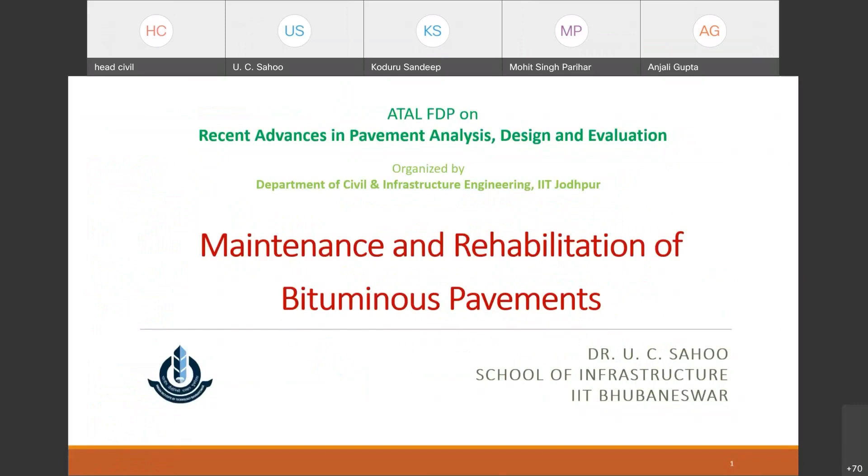This topic is basically maintenance and rehabilitation of bituminous pavements. Why I'm talking about bituminous pavement instead of just pavements in general - if you see the total network of roads in India as of 31st March 2020, it is around 62 lakhs 15,797 kilometers as recorded by the Ministry of Road Transport and Highways, and more than 90% of these roads are bituminous pavements. That's why I focused mostly on maintenance of bituminous pavements. Of course, the mechanism remains the same, however, the maintenance techniques differ for rigid pavements or concrete pavements.

The national highways comprise just more than 2%, whereas the other roads or rural roads comprise more than 70% of the total road network in the country. So when we talk about maintenance of roads, it covers both high volume roads as well as low volume roads.

If you see the growth of road network in India, it's an exponential growth, starting from 1950 to 2020-21. I have taken the data from MoRTH and plotted it, and the graph fits an exponential growth curve. With this growth, there is now a huge challenge for the agencies to maintain these roads.

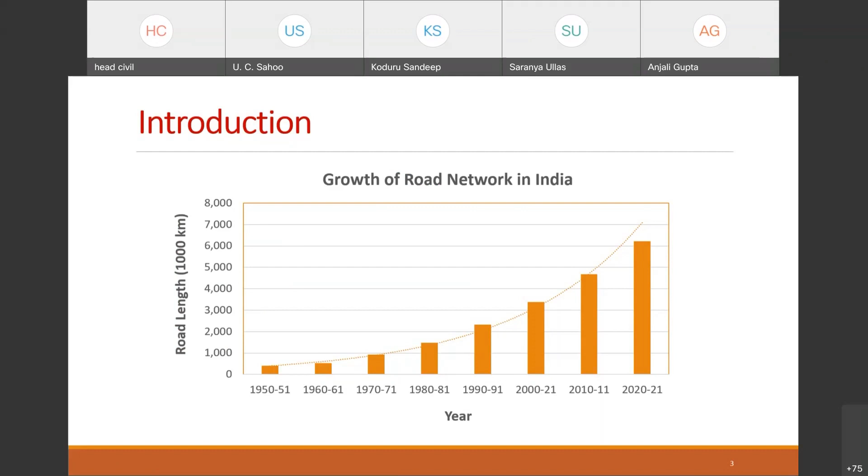So maintenance is also equally important - let us see why. The pace of highways construction in India has touched a record high of 37 kilometers per day in the financial year 2020-21. This is a big number, specifically for this developing country, and longevity of these roads is closely linked to timely maintenance and rehabilitation of the pavements. That's why maintenance is an important aspect as far as development of infrastructure is concerned.

The main concern of road users is normally to travel safely at a reasonable comfort level at any time of the year - that means it should be usable every time of the year, be it rainy season, summer season, or winter season, and at a reasonable comfort level, safely without any problem in travel. That's why road users normally assess the quality of infrastructure based on the condition of the road surface.

So maintenance is equally important as developing the infrastructure. We have been developing at a very fast rate, so maintenance should also now touch that kind of pace.

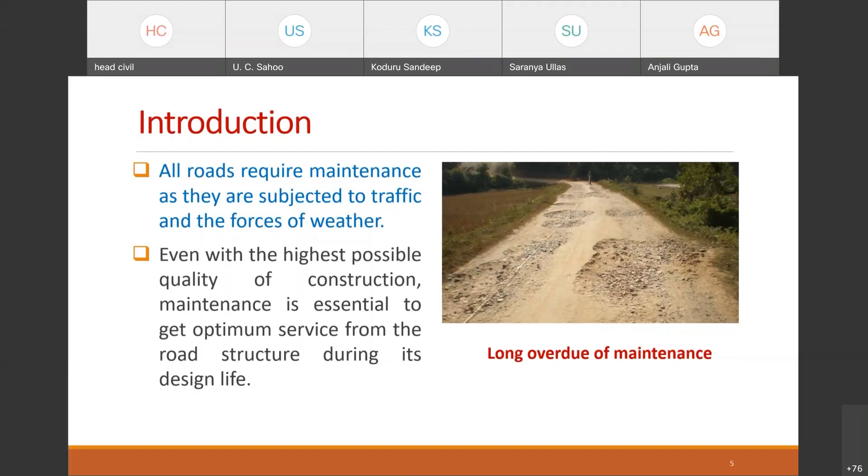So why is pavement maintenance required? Because of the deterioration of the pavements over a period of time. Why does the pavement deteriorate? Let us see the different reasons for pavement deterioration. One of the major reasons, of course, is the action of traffic - that means the heavy movement of heavy commercial vehicles, as well as overloading, which is experienced by a majority of roads, is one of the main reasons for faster pavement deterioration.

Apart from that, we have environmental factors such as ingress of water, oxidation of the binder, and loss of volatiles during heating of the binder. All this creates problems for faster deterioration of road pavements. Also, inadequacies in the initial design, specifications, and construction standards.

If the road has not been constructed considering the type of traffic and the subgrade condition, of course this may prematurely fail. As well, poor construction practice, poor specification, and poor initial design will all lead to premature failure of the pavements, which will cause the need for maintenance before it actually serves its design life period.

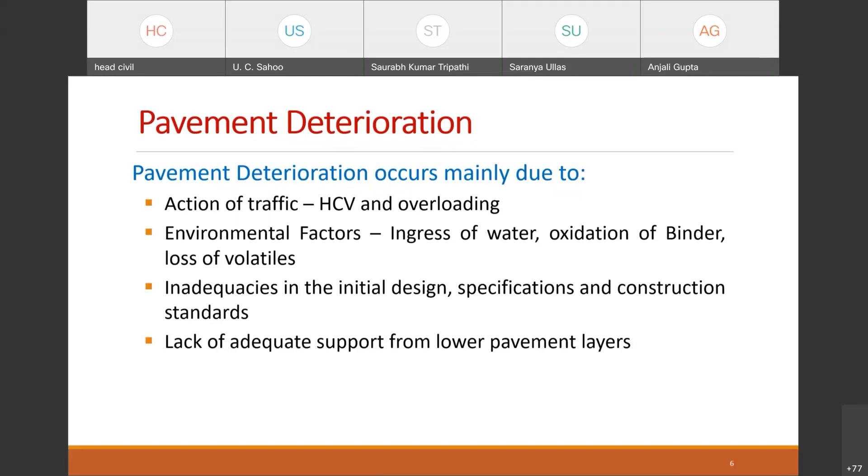That's why timely intervention is very much necessary. You need to understand where you have to take up a maintenance activity and what kind of maintenance activity, so that you can save your money and also maintain the riding comfort at a desired level.

So there is a good proverb you must be knowing: a stitch in time saves nine. That means you should understand that you have to stitch the pavement in time. That will save a lot of money as well as a lot of lives.

The rate of deterioration basically depends on the quality of initial construction, pavement and surface materials, drainage conditions, level of traffic, and the weather conditions. All these will affect the rate of deterioration of the pavements. So this is not a standard graph - it will depend on all these factors.

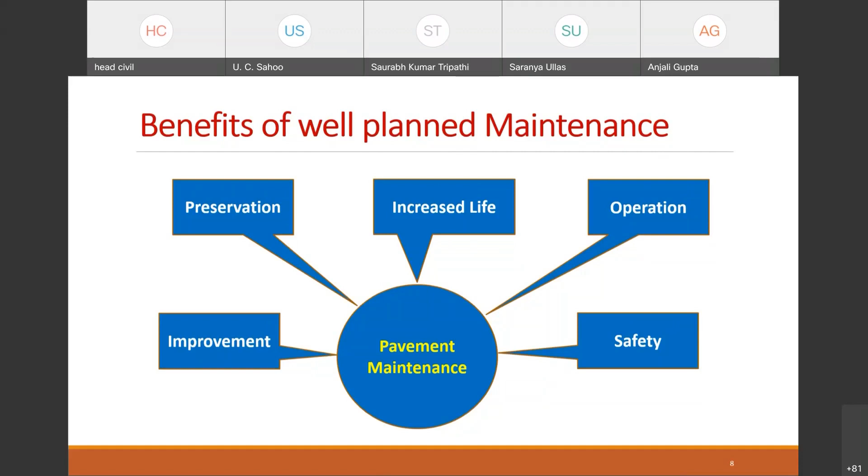So what are the benefits? It reduces the rate of deterioration, thereby safeguarding previous investments in construction and rehabilitation, because you are investing lakhs and crores of rupees in construction of the roads.

If you see nowadays, the construction of a rural road is costing around not less than 50 lakhs per kilometer, and in some states it is going as high as more than 1 crore per kilometer. For state highways and national highways, it is a few crores per kilometer. So you can understand the level of investment being made in development of this infrastructure.

But if you do not maintain them properly and timely, then you are going to lose a lot of taxpayers' money in that. So we need to understand this very carefully and judiciously, and act accordingly.

Maintenance also lowers the cost of operating vehicles, because if you have a lot of undulations, potholes, and other distresses in the pavement, it will increase the cost of operation of vehicles on that particular pavement - there is wear and tear of vehicles, fuel cost, machineries, and a lot of operating costs considered in this.

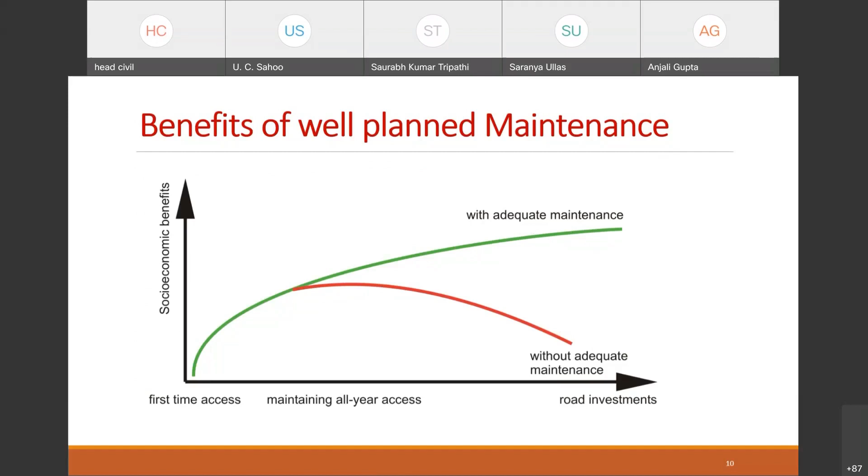There is also a need to understand the difference between maintenance and repair. There is a clear distinction between the two. Effective maintenance is clearly time-linked and is carried out before major damages are taken up.

This involves activities relating to supervision and monitoring of road assets even while they are still in good condition, so regular pavement evaluation is essential for timely maintenance. Sometimes you have to go for prediction, like plotting a pavement deterioration graph, and based on that predict how the pavement condition will be next year, and accordingly take preventive action this year so that the pavement will not fail next year, and it goes on serving traffic for a longer period without asking for major rehabilitation.

Whereas repairs are basically taken up when major damages take place or road access is cut off. It is a responsive measure, based on the damages, the repairs are taken up. Whereas maintenance is a predictive measure. Depending upon the prediction of deterioration, we take preventive action, or sometimes small corrective actions. So timely and regular maintenance requires securing sufficient funding before it becomes urgent.

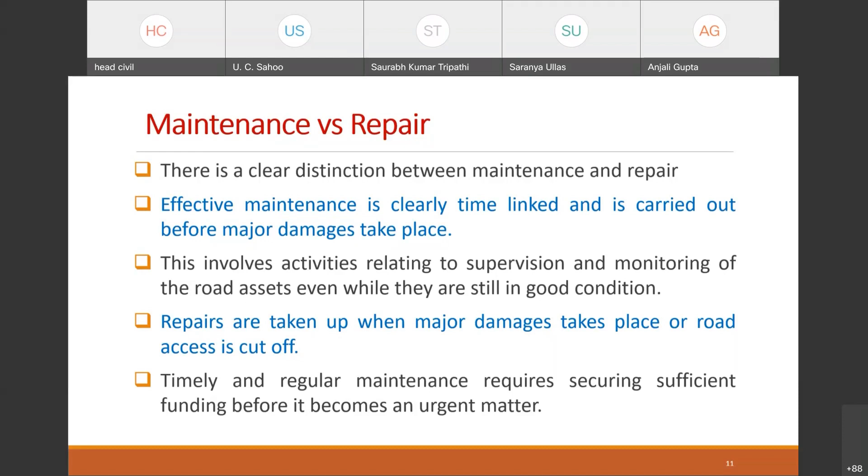Road pavement performance is determined based on the requirements of the functional and structural condition. That's why the first step for pavement maintenance is the pavement evaluation. I hope you have already gone through different pavement evaluation methods in detail. I'll touch upon some things which are linked to pavement maintenance and rehabilitation methods.

The functional requirements relate to roughness of the road surface, pavement surface distresses, along with skid resistance and other things, while the structural requirements relate to the pavement strength or the load carrying capacity of the pavements. So broadly, pavement evaluation can be categorized into two parts: structural evaluation and functional evaluation.

Structural evaluation we normally conduct using a Benkelman beam, which is a static method, and it has become obsolete in most parts of the world as well as in India, but still, with non-availability of state-of-the-art equipment like the falling weight deflectometer, which applies a dynamic loading or impulse loading very similar to actual traffic loading...

The maintenance measures are still dependent on the Benkelman beam deflection surveys. However, many agencies have now procured this falling weight deflectometer in India, and maintenance and rehabilitation actions are being based on falling weight deflectometer surveys.

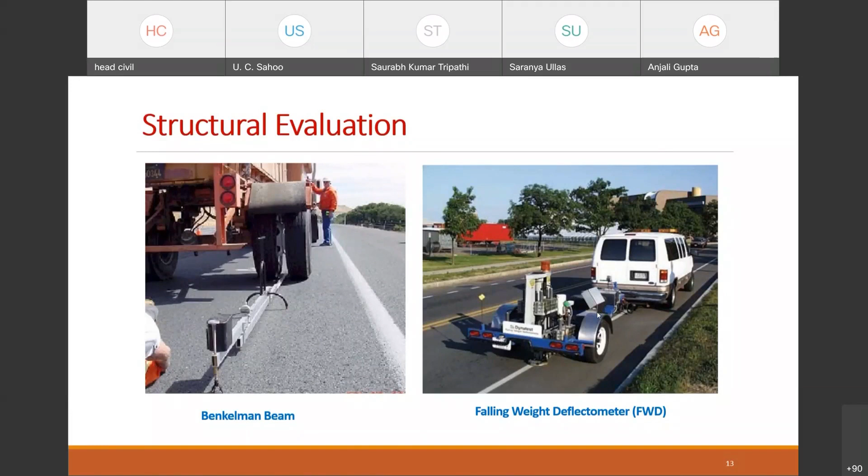So this is the falling weight deflectometer. I hope you have already gone through the literature of falling weight deflectometer in your previous presentations. If we see how it works, this is basically a non-destructive deflection testing device that delivers an impact load to the pavement surface. Here the load is dropped from a certain height, and the deflections are measured by sensors known as geophones, which are placed radially in one direction from the center of the load plate.

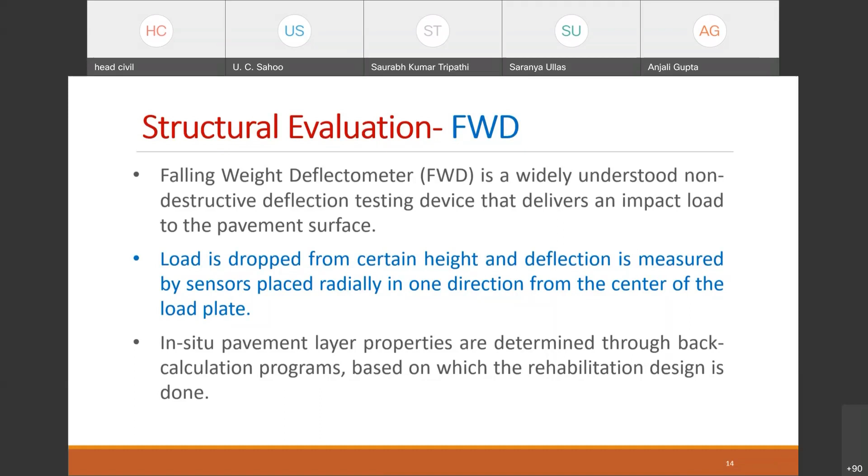Based on these deflections and the load, we try to back-calculate the in-situ pavement layer moduli. Based on these in-situ pavement moduli properties, we try to understand the existing strength of the pavement and how much overlay is required to carry the future traffic for which the pavement is being designed. Many a times we go for strengthening of the existing pavement, like for 2-lane to 4-lane expansion of pavements, we go for widening and strengthening. In those cases, we need to understand the in-situ strength, and for the future traffic for next 10 years, what should be the overlay thickness, mostly based on these deflection parameters.

The functional evaluations we normally evaluate in terms of skid resistance, roughness, as well as different pavement surface distress mapping. Surface distress mapping is mostly done using visual methods, but nowadays there are many automated methods used for different distress mapping. Skid resistance is normally measured by a simple device called the British pendulum skid resistance tester, which is used to measure the skid number of the surface, based on which we say whether the surface is skid resistant or not.

For roughness measurement, there are many devices, but the one mostly recommended in India as per IRC guidelines is the fifth wheel bump integrator. There are other devices too, like MERLIN or other roughometers, ARRB roughometer, or smartphone-based roughness devices. Many such devices have come into the market. Some are profilometric and some are response-type roughness devices. I'm not discussing these in detail since they've already been covered, and I'm presuming you already have this knowledge.

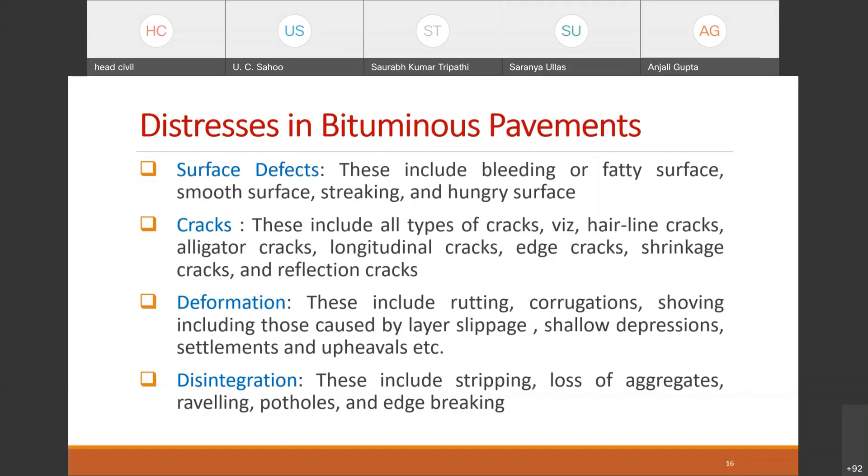What are the likely causes? Bleeding is normally caused by one or a combination of the following factors: excess binder in the hot mix, lower voids in the mix, use of softer grade binder, or too heavy a tack coat or prime coat applied below. You should already understand the concept of optimum binder content and optimum air voids from hot mix and warm mix design. If you have lower air voids, under densification from traffic movement, the binder will come out—which we term bleeding. Also, if you use softer grade bitumen with a lower softening point, when pavement temperature becomes high, the bitumen becomes soft and bleeding occurs. All these are causes of bleeding.

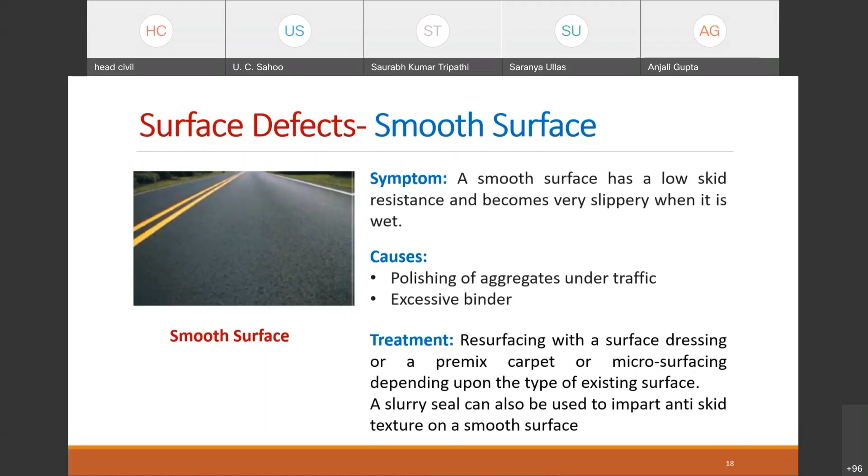Hungry surface is characterized by the loss of fine aggregates from the surface, or the appearance of a dry surface with fine cracks. The causes are basically low bitumen content in the surfacing layer, and use of absorptive aggregates in the surfacing layer, which absorb some percent of bitumen, so the effective bitumen becomes less and you find bitumen hungry surfaces.

The treatment is basically a fog seal or liquid rejuvenating material, or you can also go with a slurry seal or microsurfacing. These treatment methods we will discuss in a separate slide later.

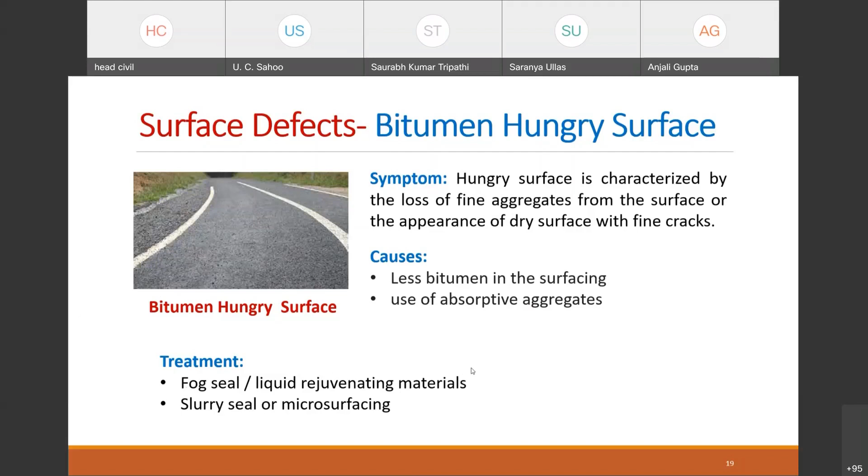Cracking in bituminous pavements includes different types like block cracking or fatigue cracking, alligator cracking, edge cracking, longitudinal cracking which may be wheel path or non-wheel path cracking, reflection cracking, and transverse cracking.

These are block cracking or fatigue cracks - a series of interconnected cracks forming small irregular blocks in the pavement surface, normally observed along the wheel path. This looks like the surface of an alligator, which is why these are also called alligator cracking.

The causes are excessive deflection of the pavement surface, inadequate pavement thickness and inadequate surfacing layer, and weakening of the subgrade or lower layers that results in higher deflection or bending of the bound layers, overloading by heavy commercial vehicles, and brittleness of the binder due to aging or oxidation, which makes the bitumen brittle and causes the asphalt to crack.

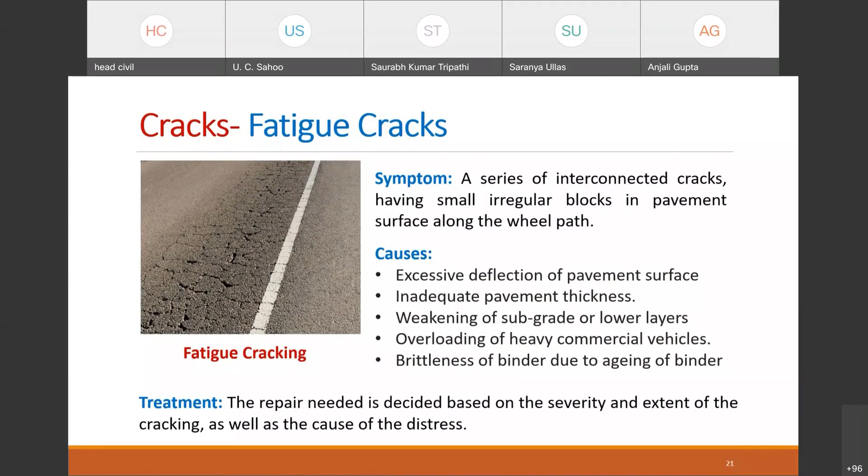The repair is decided based on the severity and extent of the cracking as well as the cause of the distress. Since fatigue cracking is a structural cracking, you need to investigate whether it initiated from the lower layers or the upper layers. Accordingly, the treatment method will be selected.

Longitudinal cracks appear in the longitudinal direction, normally parallel to the center line of the road. Causes include alternate wetting and drying beneath the shoulder surface, and improper or weak joints between adjoining layers. Also, if there is expansion or moisture movement in the subgrade, that creates longitudinal cracks in the pavement.

Treatment is basically crack sealing, preferably using rubberized bitumen, or if it is severe, you should remove and replace the cracked pavement layer with a fresh overlay.

Similarly, we can have transverse cracks. These cracks appear in the transverse direction, perpendicular to the traffic movement direction. The causes again are alternate wetting and drying beneath the shoulder surface, and improper or weak joints between adjoining layers.

Treatment is basically crack sealing, preferably using rubberized bitumen, or the same way, remove and replace the cracked pavement layer with a fresh overlay.

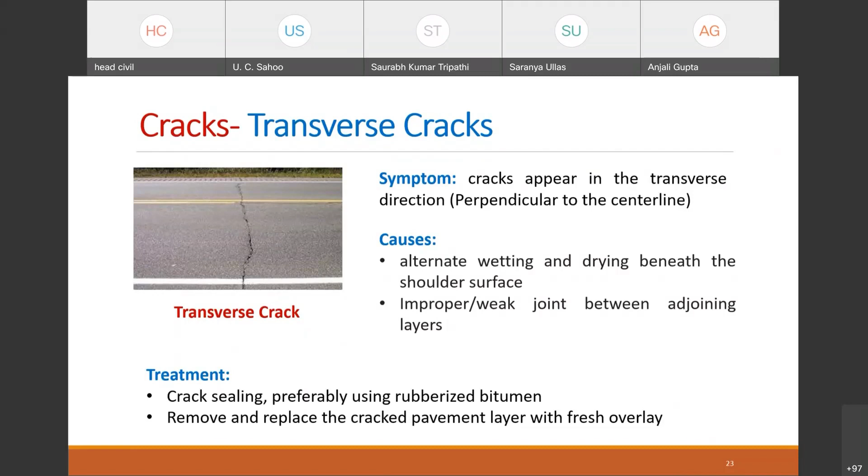Reflection cracks are reflections of cracks from the bottom layers. This normally happens when you put the surfacing over a hydraulically bound material, whether a stabilized layer or a cement concrete layer - these reflection cracks normally occur.

Symptoms are sympathetic cracks that appear in the bituminous surfacing over the joints and underneath the cracked pavement. The major cause is differential movement across the underlying cracks or joints. Due to stress concentration at the cracks forming in the bottom layers, the surface cracks, known as reflection cracks.

The treatment is either sealing individual cracks, and if there are wider cracks, going for a slurry seal, while for fine cracks using a fog seal, or else using a SAMI layer, that is a stress absorbing membrane interlayer. This must already be covered in your pavement design, specifically for flexible pavement with cement stabilized bases, where we recommend a SAMI layer so that reflection cracks do not occur on the surface.

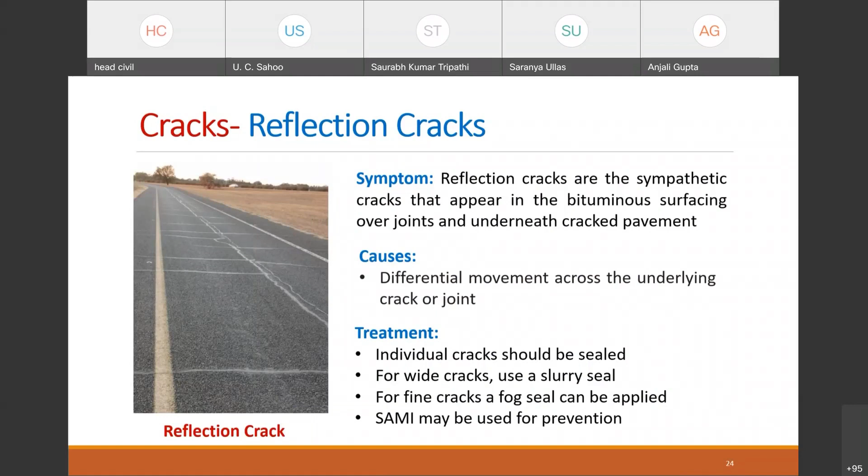For control of reflection cracking, you either go with a SAMI layer, or normally apply a geogrid over the existing layer or pavement which is likely to crack or already cracked. So you put the glass geogrid here, and then over that you put your surfacing layer, and your reflection cracks can be minimized to a large extent.

The next one is, of course, deformation, where there are different types of deformation that we see in a pavement: slippage, rutting, corrugation, shoving, shallow depressions, and settlement and upheaval. Let us understand one by one their causes and then their remedies.

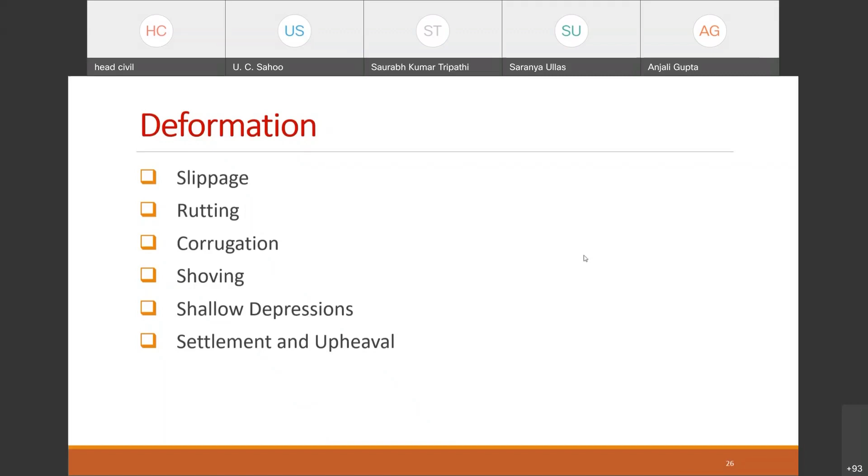This is nothing but slippage. We can easily see that the surface has slipped. Slippage is basically the relative movement between the wearing course and the layer beneath it. If there is improper bond between the wearing course and its bottom layer, there are chances that the layer may slip under the dynamic action of the traffic.

So what are the causes? Inadequacy of the tack coat. Normally the tack coat is applied to act as a binding layer between the bottom layer, which is normally the binder course or DBM layer, and the surfacing layer above it. So if the tack coat is inadequate, or there is a lack of bond between the wearing coat and its lower layer, or presence of fine dust, moisture, or both between these two layers, that will also create a lack of bond, which is one of the major causes of slippage.

So what is the treatment? The treatment is that you have to remove the surface layer around the affected area, and then go for patching the area with a premix material after applying a tack coat. So it is removal of the material from this area, and then replacement with fresh premix material.

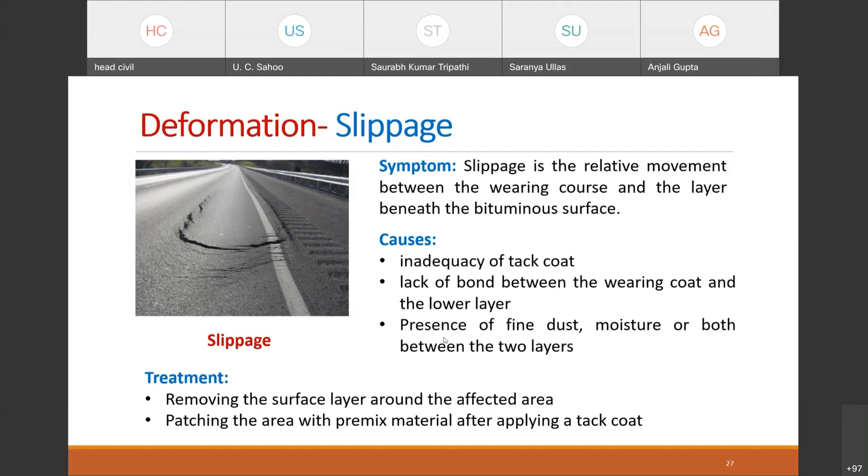Then rutting, which is very common, is basically the longitudinal depression that you see in the pavement along the wheel path. With repeated application of load, there is a permanent deformation. With each repetition of load there is some recoverable deformation and some irrecoverable or plastic deformation. Though that plastic deformation is very small, over a period of time with a large number of repetitions, it accumulates and becomes a large permanent deformation, known as rutting. This is one of the major design criteria in flexible pavement design.

The causes of rutting are basically heavy channelized traffic and overloading of vehicles, inadequate compaction of the layers, improper mix design of the surfacing layer, intrusion of moisture into the pavement, and weak pavement due to poor subgrade quality. All these individually may cause rutting, or it may be a combined action of all these causes that results in rutting of the pavement surface.

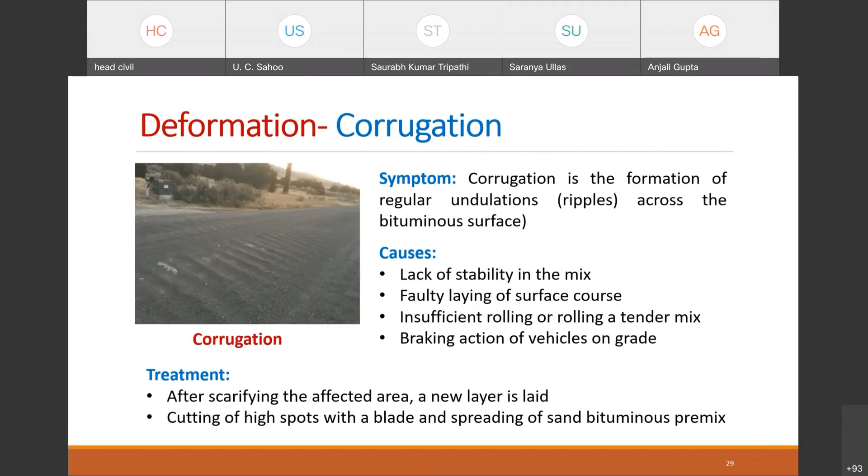Treatment for such kind of distresses may be removal of the material in the affected area down to the firm base and then laying a stable premix patch over that. So depending upon the actual reason of shoving or rutting and shoving, a corrective action will be taken.

Then comes your shallow depression. Shallow depressions are basically isolated, low, limited size dips of about 25 millimeter or more in depth below the existing profile of the road, which are normally known as shallow depressions. You can observe the shallow depression in form of ponding of water on the road surface in patches.

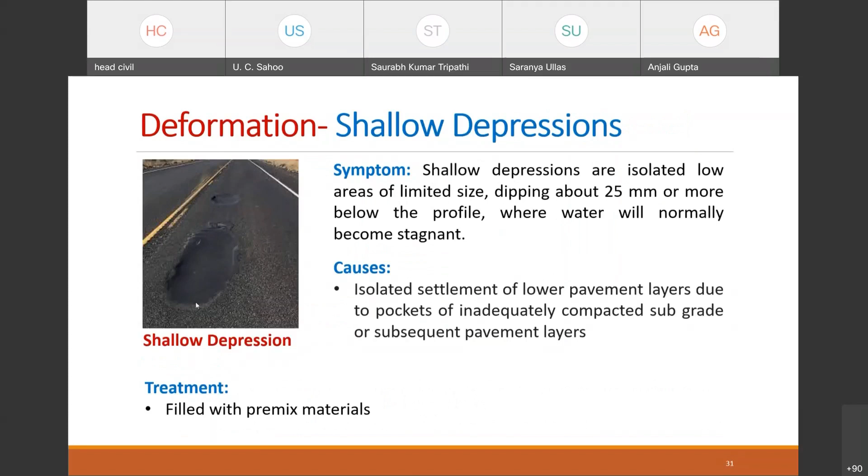Then comes settlement and upheaval. What is settlement? You can see the shallow depression is in a very small area, whereas if it is continuous for longer distances, then we call that settlement. These are characterized by relatively large deformations of the pavement compared to the shallow depressions.

Causes are basically inadequate compaction of the surfacing mix as well as the other layers, excessive moisture in the subgrade, and inadequate pavement thickness, which results in such kind of large settlements along the wheel paths. So treatment, basically it may be necessary to excavate the defective fill and do the embankment afresh.

Under properly controlled conditions, because most of the time these kind of things are linked to the swelling and shrinkage characteristics of the subgrade soil. So if you find out it is the reason coming out from the subgrade level or embankment level, then corrective action should be taken at that location.

Else, if it is related to the mixes, then the mix should be redesigned to a stable mix and laid well compacted to reduce the settlement and upheaval of these pavement layers. You also need to improve the drainage characteristics of the pavement at this location if needed.

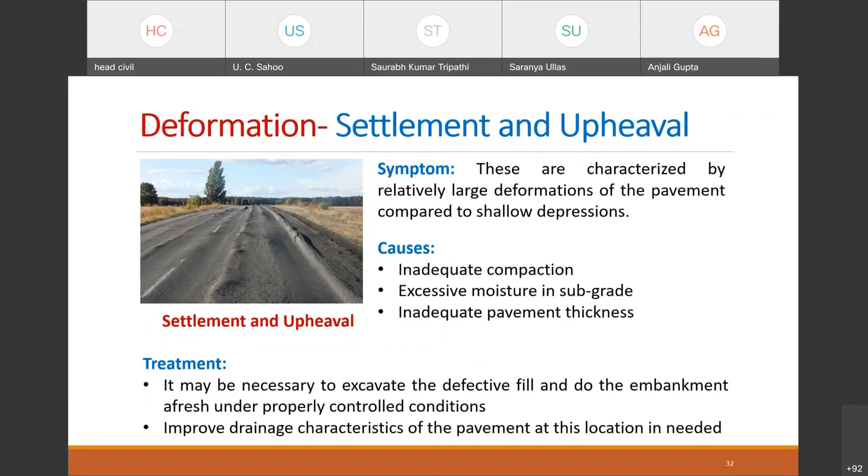Lastly, the fourth category of distress is basically disintegration. Disintegration is in the form of stripping, raveling, potholes, and edge breaking. These are the categories I have taken from IRC 82. The categories can be different from person to person.

So we can categorize depending upon our understanding also. Disintegration is basically stripping. Stripping is nothing but loss of bond between the aggregates and the binder, which is known as stripping. It's characterized by the separation of the bitumen film from the surfaces of the aggregates due to presence of moisture.

So there is a constant contact of moisture to the bitumen surface, and stripping is likely to occur. The major causes are use of hydrophilic aggregate, meaning water loving aggregates, inadequate mix composition. If you do not have proper binder content, that will result in stripping, continuous contact with water, then presence of dust or moisture on the aggregate surface, which will cause delamination of the binder from the aggregate surface and will cause stripping.

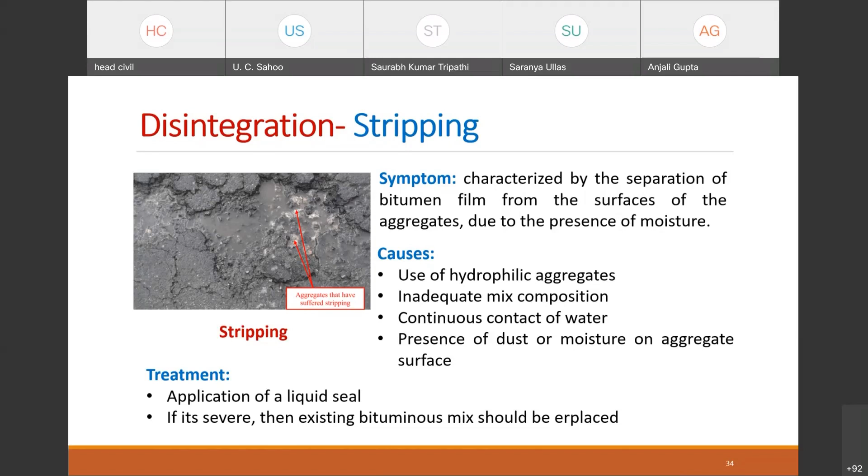Then comes your raveling. Normally, raveling is basically a progressive separation and dissociation of fine aggregate particles and binder from the bituminous surface. So the next stage of stripping is, of course, raveling. When the stripping starts occurring, you can see the aggregates have become loose and are lying on the surface.

These aggregates are prone to be lost with the movement of traffic, under the action of traffic. So this is nothing but raveling, one of the major distresses that we see in poor drainage condition areas. The causes are basically inadequate bitumen content in the mix, overheating of bitumen during the mixing process, and construction during cold and wet weather.

If you do not maintain the temperature during mixing and compaction, it will cause stripping of the binder and also cause raveling of the pavement surface.

Treatment: application of a liquid seal coat in case of low severity, but in case of high severity, raveling may be corrected by a single or multiple application of liquid seal coat, slurry seal, microsurfacing, or a thin overlay. Note down all these maintenance measures; we will discuss them subsequently after a few slides.

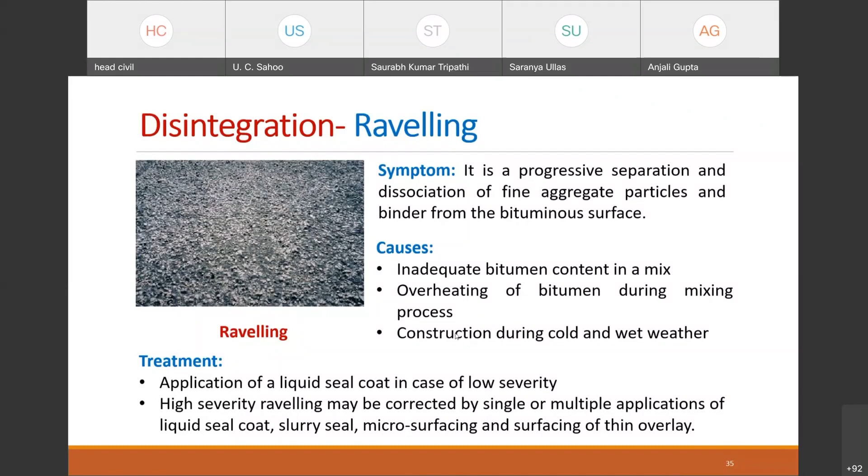This is very common, and in our day-to-day life we see these potholes. The pothole is the last type of failure we see. It normally starts from a crack, and when there is a crack, there is ingress of water into the surfacing layer. This causes more cracks in that area, then stripping, disintegration, raveling, loss of aggregates, and finally formation of potholes. So it actually starts from the cracks.

So in the beginning itself, if you can seal the cracks in time, these potholes will never form. However, there are other reasons for formation of potholes too, such as loss of adhesion in the bituminous wearing coat, rutting, and depressions on the surface.

So the treatment normally done is patching with hot or cold bituminous mixes, and it should be patched effectively so that it lasts longer.

Pothole repair has to be done in the correct way. This includes cutting back the pothole, reaching a sound road base. You have to actually reach up to the layer where you find a stable base. So the pothole area, you cut it out like a rectangular area along this curved line.

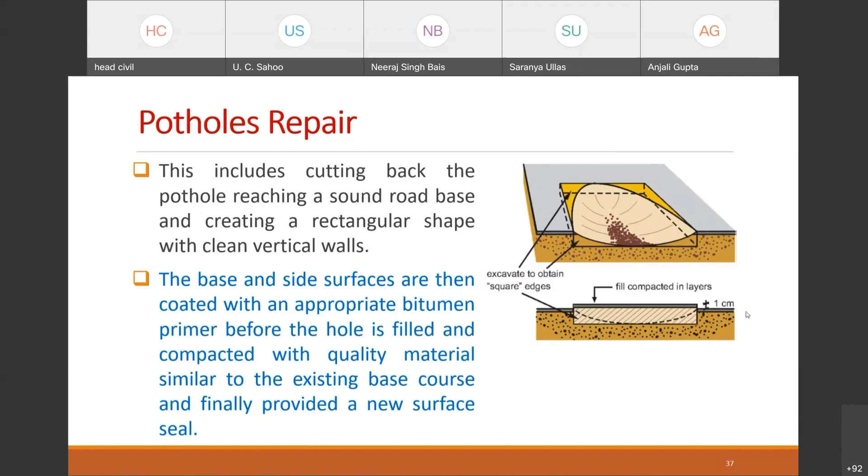Then fill it with a patch mix, which can be a cold patch mix or a hot patch mix, and keep it at least 1 centimeter above that level, so that compaction under the traffic also happens and it slowly reaches the level of the existing road surface. That's how the patching should be done to correct the potholes.

Most of the time, this is due to poor subgrade condition, or sometimes due to overhang of the surfacing layer onto the shoulder, which causes it to start breaking. So you have to maintain the shoulders to avoid such edge breaking. Pavement materials in the affected area should be carefully removed to a regular section with vertical sides.

Apart from these visual distress surveys, we also use automatic pavement distress mapping. I hope all of you know what the automatic pavement distress measurement method is. This is an automatic road analyzer, and there are other vehicles like network survey vehicles, equipped with different types of sensors and computers that can automatically collect distress data from the pavement.

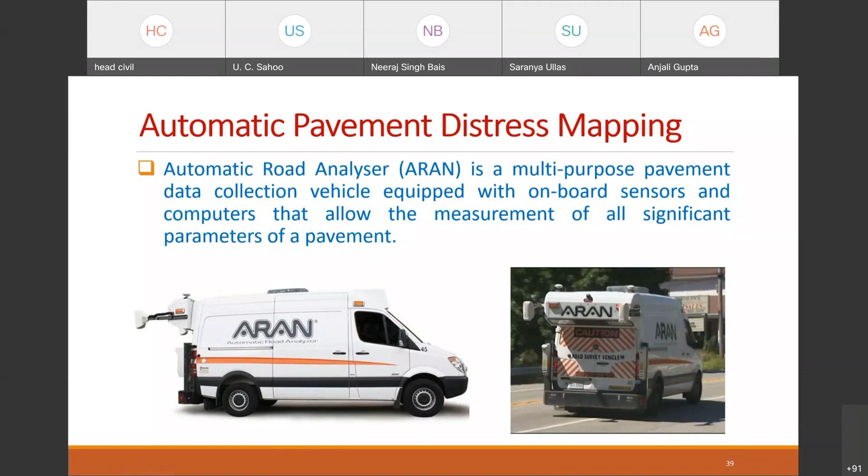This road analyzer is configured to measure the longitudinal profile of the road in terms of roughness, or transverse profile meaning rut depth, surface macro texture, crossfall that is camber, gradient, and radius of curvature, all measured through this, along with a forward view video using a broadcast quality video camera.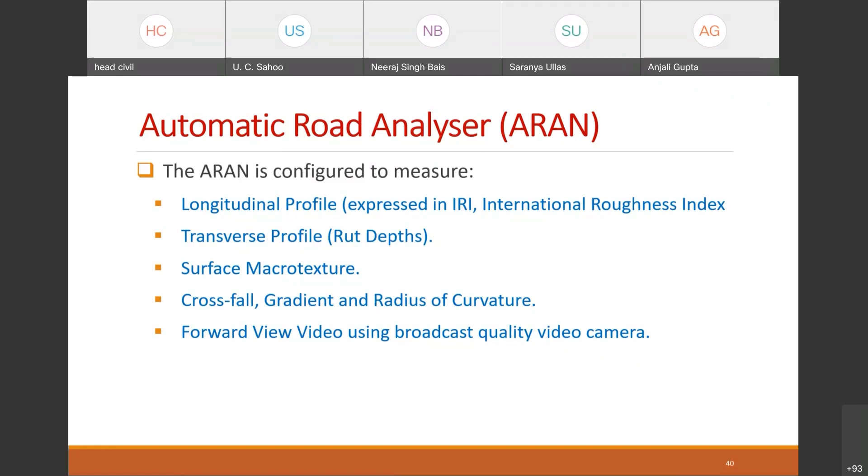Once you collect these videos, they are processed using programs based on artificial intelligence and machine learning tools that can segregate and find out the different types of distresses, map them, and find their percentage, based on which the maintenance can be taken up.

After knowing all these pavement conditions, you have to go for pavement condition rating. As per IRC 82, you have to rate the pavements by looking at the cracking area, raveling area, pothole area, shoving area, patching area, and settlement. After identifying these, you quantify them based on the data, whether collected visually or through an automated source.

Nowadays people are also using drones to collect this distress data and then find out and quantify them. This is how you get the different types of distresses and the range of distresses, and you give a rating.

We give a rating, 1.1 to 2, like this, based on the condition whether it is poor, fair or good. This basically is for highways. We normally follow this, but for MDRs and rural roads, we follow a different kind of rating system. This is slightly on a higher side because these are less important roads, and we can allow slightly higher values since the acceptability on rural roads is higher.

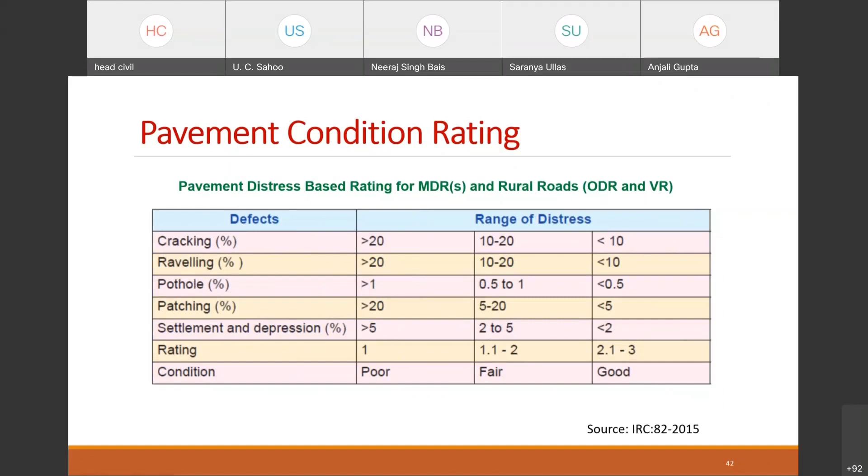For urban roads also, there are rating systems as given in IRC 82. You can follow this rating system for cracking, raveling, potholes, settlement, and rut depth.

We also have serviceability indicators for highways, which give an indication of when you should take up the maintenance job. The two major serviceability indicators are roughness and skid resistance. For highways, roughness for level 1, level 2, or level 3 service, based on whether it is good, fair or poor surface, the indicator is 1800 millimeter per kilometer, or 1.8 IRI, 2.4 IRI, or 3.2 IRI, which will trigger the maintenance needs.

Skid resistance, using the British pendulum skid resistance tester, gives us a skid number. Of course we need a higher skid number. These skid numbers are 60, 50 or 40 for different types of road surfaces. The recommended value is 50 to 55 for most highways. For urban roads, the serviceability indicators are given in IRC 82 in terms of roughness and skid resistance, measured as BPN, British pendulum skid number.

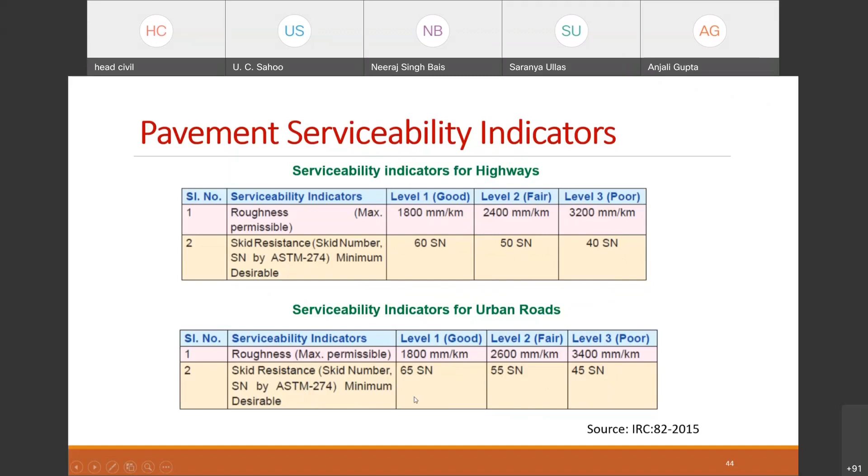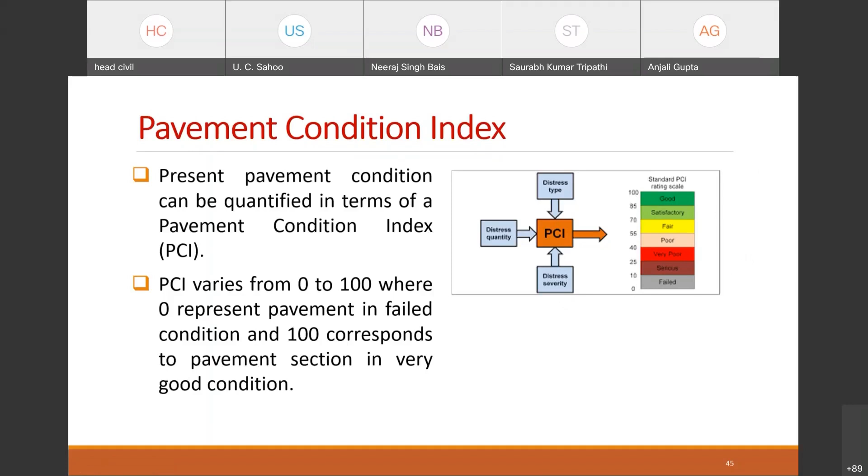We also find another terminology or rating system, the pavement condition index. A methodology is given to find the PCI on a scale of 0 to 100, which gives the present condition of the pavement surface. This PCI is evaluated based on distress type, distress quantity, and distress severity. The PCI value is determined on a scale of 0 to 100, where 100 is excellent riding condition and 0 is fail condition.

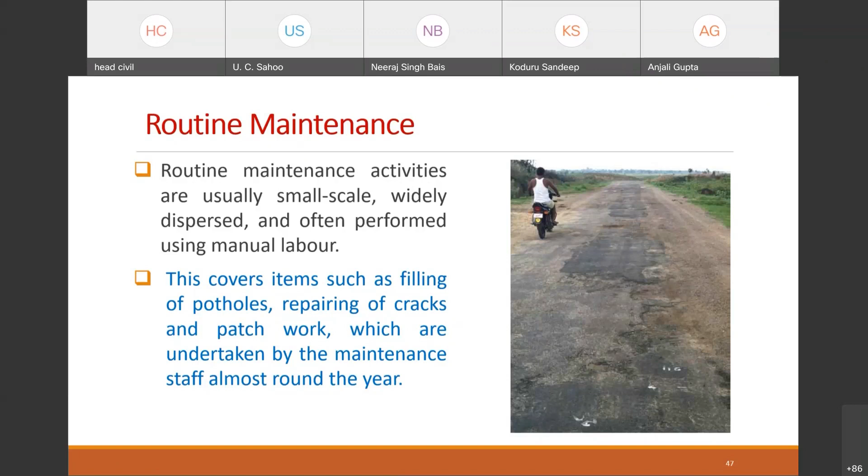Preventive maintenance is a planned maintenance activity which decreases the surface deterioration. You predict the kind of deterioration that may happen, and based on that prediction, or sometimes based on taking some corrective measure, you go for preventive maintenance. So preventive is not always corrective; it is actually based on predictive factors.

This is a planned maintenance activity which decreases the rate of surface deterioration. It improves or extends the functional life of the pavement surface while it is in good condition, making it a cost-effective treatment. When the pavement itself is in good condition with good riding comfort, it is expected that if you do not take up a maintenance measure today, the pavement deterioration will be faster after a year.

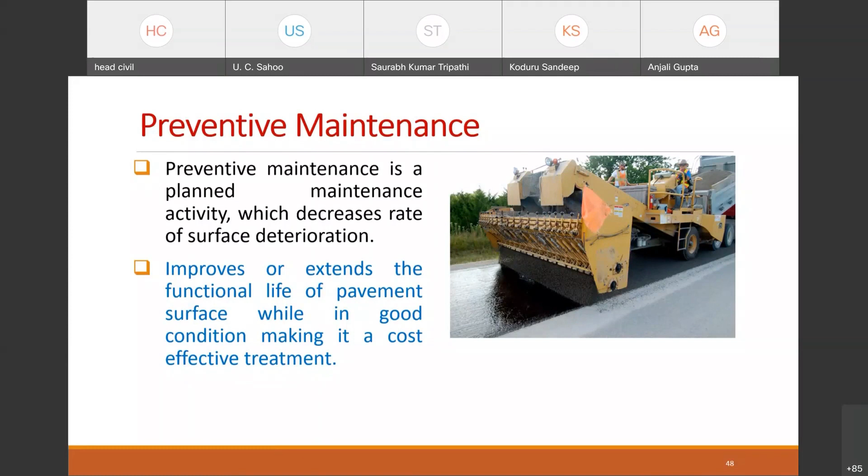Periodic maintenance is an overall measure of a road, typically carried out after a period of 5 or 10 years, depending on the traffic levels, pavement type, and geographical and weather condition.

Normally, for rural roads or PMGSY roads, up to 5 years they maintain the roads in terms of patching, pothole repair, crack sealing, and these things. But after 5 years, they go for a renewal, which is nothing but periodic maintenance. After 4 or 5 years, or after 10 years, normally we go for overlaying, which may even be a very thin overlay. That is known as periodic maintenance.

The most common periodic maintenance activities include the renewal of the road surface and major repairs of structures.

The general practice in the country is to finalize the renewal program on an annual basis, deciding which roads are to be taken up this year for renewal. This renewal program for each section of road should be decided well in advance.

Depending upon the condition rating, as seen in earlier slides, based on different types of distresses, you can arrive at the condition rating. Based on the condition rating for different road categories and roughness levels, there are suggested treatments for periodic maintenance, normally followed in India as per the IRC 82 guidelines.

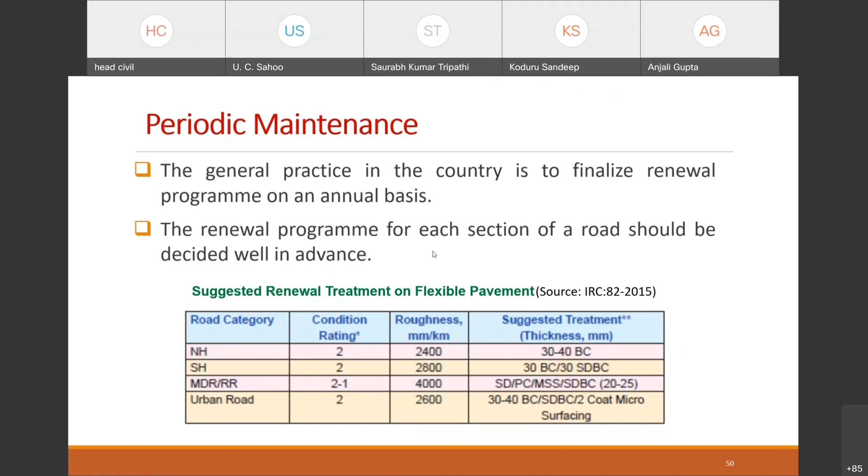Special or emergency maintenance responds to occasional or unforeseen events such as landslides, washouts, large trees or debris on the road, and broken drainage structures, which cause the need for emergency repair works. That comes under special repair and maintenance activities.

Then there is strengthening and rehabilitation. In strengthening and rehabilitation, we can go with bituminous pavement alternatives like overlaying, recycling, and reconstruction.

In case of strengthening, thin overlays should not be applied. As mentioned, less than 40 millimeter overlays are not applied when structural overlays are required, because if applied on a severely cracked pavement without detailed pavement investigation, a lot of reflection cracks will occur and the pavement will prematurely fail again.

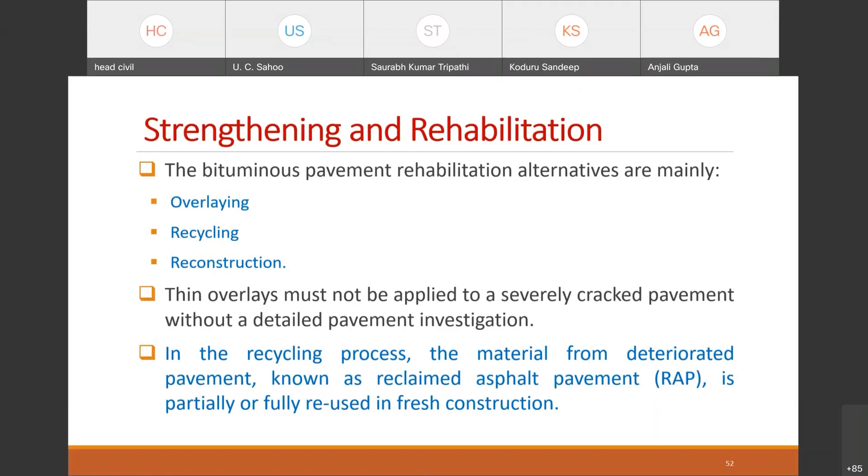In the recycling process, normally the material from the deteriorated pavement, known as reclaimed asphalt pavement or RAP, is partially or fully reused in the new construction. I hope all of you have some idea about RAP material and how it is used in asphalt pavement recycling. We'll also have some slides on recycling of pavements.

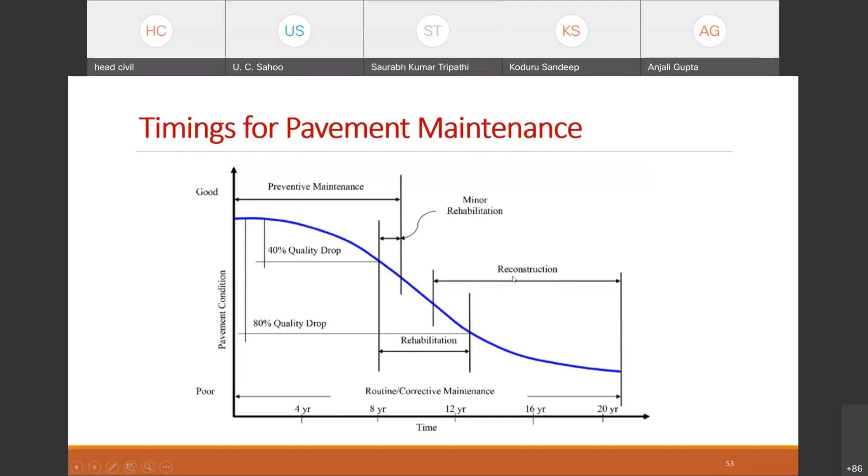These are the timings for taking different types of maintenance: preventive maintenance, minor rehabilitation, major rehabilitation, and reconstruction. You can see how with preventive maintenance, the pavement life can be enhanced. When you apply pavement preventive maintenance at this point, with a cost which is very low at this point of time, you get a benefit in terms of major strengthening and rehabilitation. If you do not do the preventive maintenance at this cost, at this point of time, you have to pay much more money for rehabilitation later. That's why it's called a stitch in time saves nine, and if you do preventive maintenance at the right time, you can save a lot of money that would otherwise go into major rehabilitation or even reconstruction.

That's why preventive maintenance is very, very important and should be practiced a lot. So what are the advantages? Improved level of service resulting from improved pavement performance. Since you go for the preventive measure when the pavement is in good condition itself, it increases the riding quality with this thin layer of bituminous surfacing, delays the rehabilitation need and reconstruction, and saves money when you go for life cycle cost analysis.

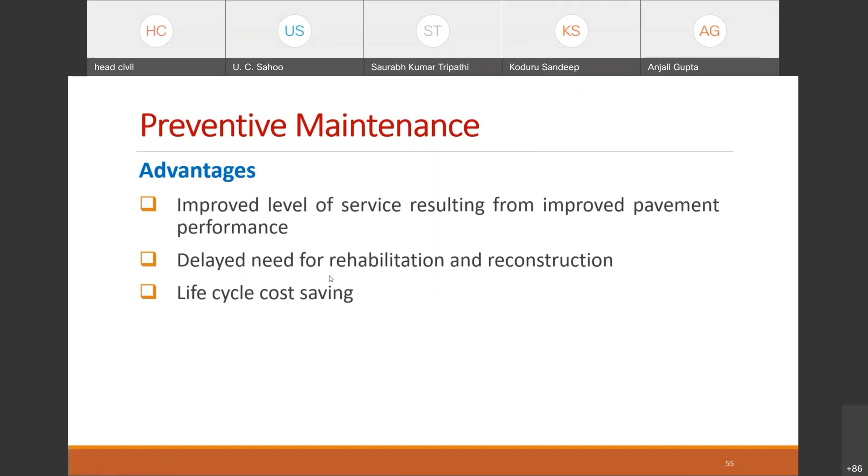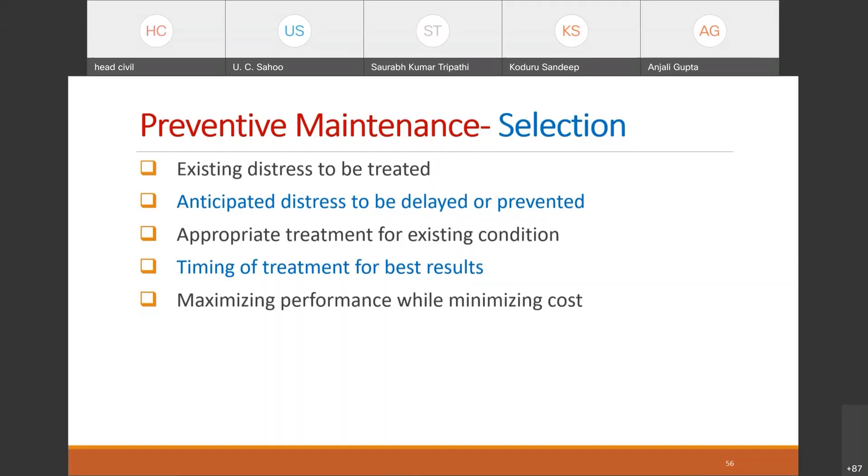So how do you select the type of preventive maintenance? There are different types. How to select a particular one: first you have to understand the existing distresses to be treated, what are the different types of distress, the anticipated distress to be delayed and how much to be delayed, the appropriate treatment for the existing condition, the timing of the treatment based on the deterioration graph, and maximizing performance while minimizing cost. There are different types of preventive maintenance.

We have been discussing all these things in our previous slides, but let us discuss what they are: crack sealing or crack filling, fog seal, slurry seal, microsurfacing, chip seal or surface dressing, thin surfacing, and ultra thin friction courses. These are all considered as thin surfacing layers or thin sealing layers and considered as preventive maintenance measures. Let us understand one by one.

Crack sealing and crack filling: we normally use either polymer modified binders or rubber modified binders for sealing of the cracks, as and when it occurs in the pavement, or sometimes as part of the preventive maintenance program.

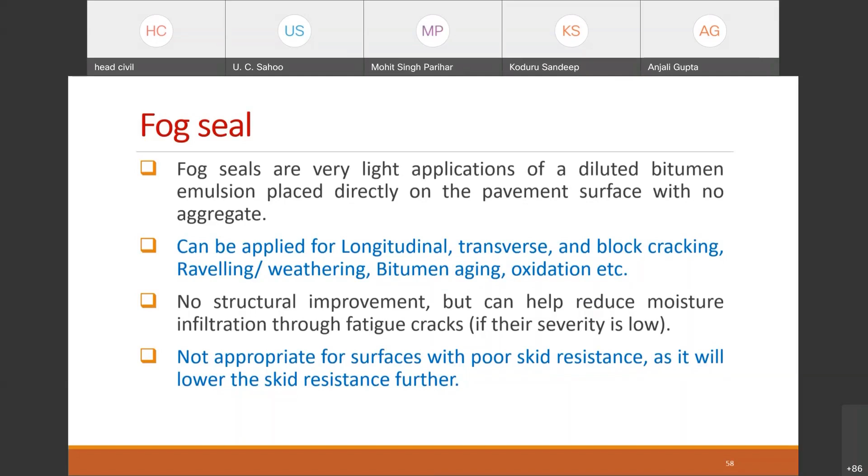So if there is already a bleeding surface and similar issues, never apply these fog seals over that. So what is this?

Basically, we apply a slow setting bitumen emulsion. I hope all of you by now know the different types of emulsion, like slow setting, medium setting, and rapid setting emulsion, which are applied for different types of constructions. Here in fog seal, normally we apply a slow setting emulsion, which requires a larger time to break, and the pavement is sometimes closed for 2 hours for curing before it is opened to traffic.

The next is your slurry seal. This is basically a mixture of well-graded aggregates, normally fine sand and mineral filler, smaller size aggregates, and bitumen emulsion that is spread over the entire pavement surface in a very thin layer of less than 10 millimeters. It is effective in sealing the...

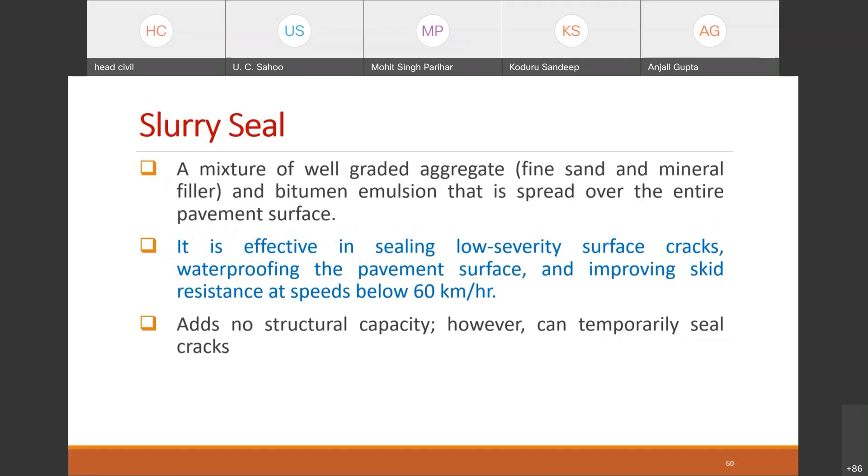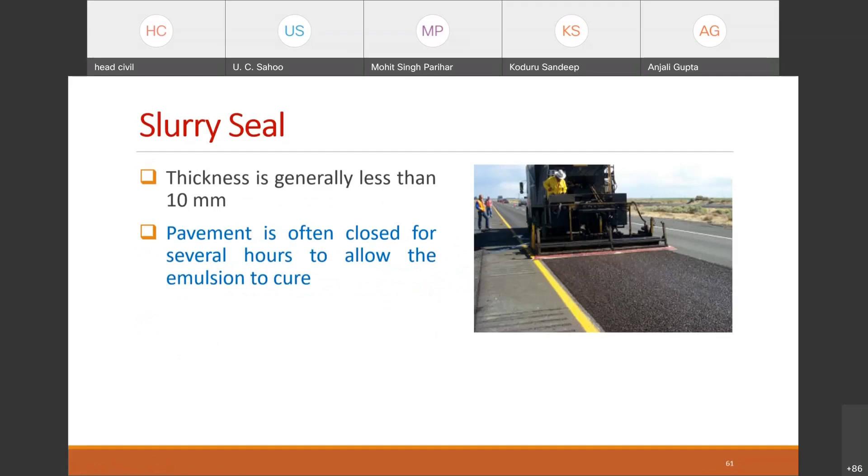Then comes microsurfacing. Microsurfacing is a relatively advanced technique. This consists of a mixture of polymer modified emulsified asphalt, mineral aggregate, mineral filler, water, and additives, applied in a process similar to slurry seal. Application is the same as slurry seal, but here the mixture composition is different. Here you use polymer modified bitumen emulsion, mineral aggregate or small fine aggregates, mineral filler, water, and additives. Additives are other chemical agents which we add.

These are used primarily to inhibit raveling and oxidation of the pavement surface. If you observe raveling and oxidation due to aging of the pavement surface, then you should go with microsurfacing. This is applied in a thickness of 6 to 8 millimeters, and is applied when there are no major irregularities in the pavement surface. It can actually fill irregularities and rut depth up to a thickness of 40 millimeters, and this is effective in all climatic conditions.

This is a very effective technique for maintaining the pavements, when the pavement is in good structural condition. Only to improve the functional qualities, we go for these preventive maintenance methods. So this is how you go with microsurfacing.

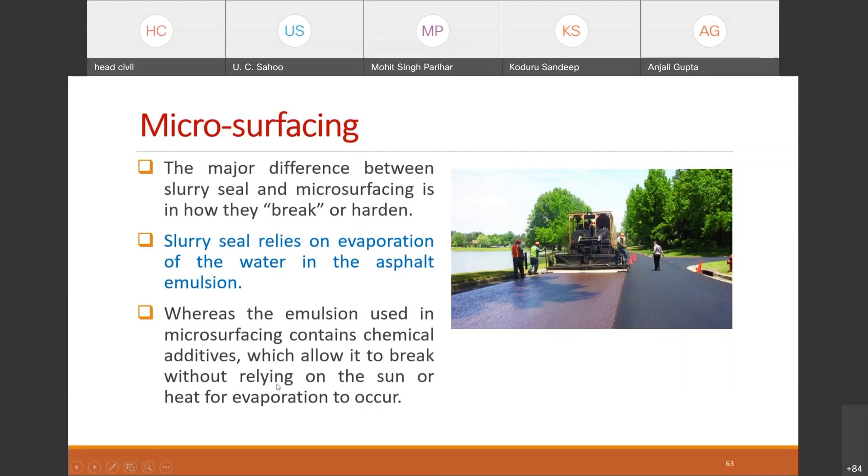So the major difference between slurry seal and microsurfacing is how it breaks or hardens. Slurry seal basically relies on the evaporation of water in the asphalt emulsion by the action of the sun, or natural heat. Whereas the emulsion used in microsurfacing contains chemical additives or breaking agents, which allow it to break without relying on the sun or heat for evaporation to occur. So this can happen on its own, by use of different chemical additives which are used for accelerated breaking of the emulsion.

So the advantages are basically a marginal rise in the pavement height, less environmental pollution because there is no heating of the bitumen and all, increased skid resistance, faster laying process, and high durability due to rubber additives. Because we go with modified emulsion, whether polymer modified or rubber modified, we get higher durability.

The next one is chip seal or surface dressing. All of us understand what surface dressing basically is. This is basically bitumen emulsion or hot bitumen normally applied directly to the pavement surface, followed by application of aggregate chips, and then immediately rolled to embed the chips.

This chip seal or surface dressing can be constructed as single coat chip seal or double coat chip seal. Again, this adds no structural capacity similar to others, and improves surface friction, also effective at sealing some of the fatigue cracks, and can be applied as one coat or two coats as I said. With proper design and construction, chip seals can perform well even on high volume roads. Normally these are recommended for low volume roads, but they can also be used for high volume roads.

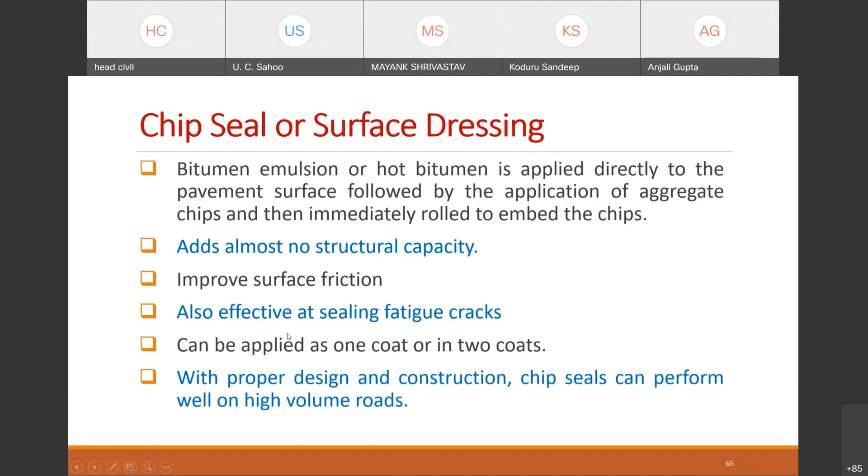So this is how the chip sealing is done.

This is very common in the US and many other developed countries. Their major preventive maintenance is this chip sealing technique or microsurfacing technique.

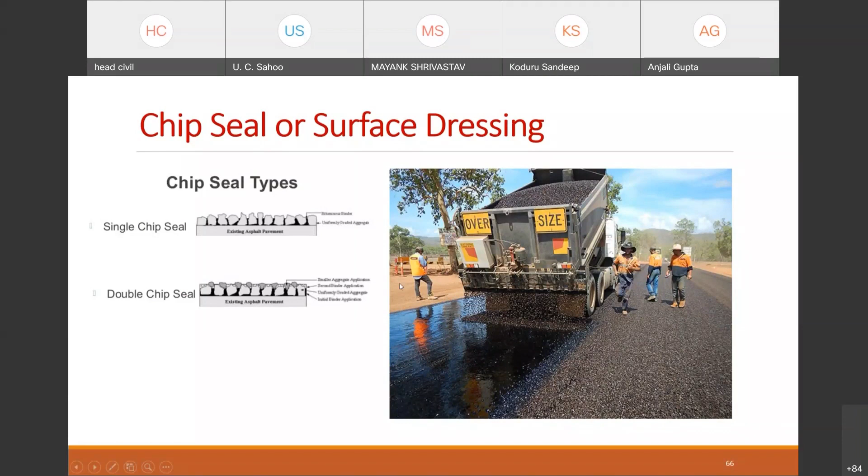Then comes thin hot mix or cold mix bituminous overlays. Normally a plant mix combination of asphalt cement and aggregate is applied to the pavement as a thin overlay, and thicknesses normally vary between 15 to 25. It can be a premix carpet, open graded premix carpet, or a stone matrix, maybe using smaller size aggregate, or maybe open graded friction course and all this.

So thin hot mix or cold mix can be applied as a preventive maintenance measure depending upon the type of distress that you see, and then predicting the type of distress that may occur over a period of time.

So then the last one, of course, is the ultra thin friction courses, which are also known as open graded friction course. This is a relatively new treatment, and this is being followed in many highways where the design speed is very high.

And the water stagnation on the road surface may cause problems for plying of the vehicles, causing skid resistance related problems.

These ultra thin friction courses are basically gap graded aggregates, prepared with polymer modified binders and a thickness of 10 to 20 millimeters, and normally placed over a tack coat.

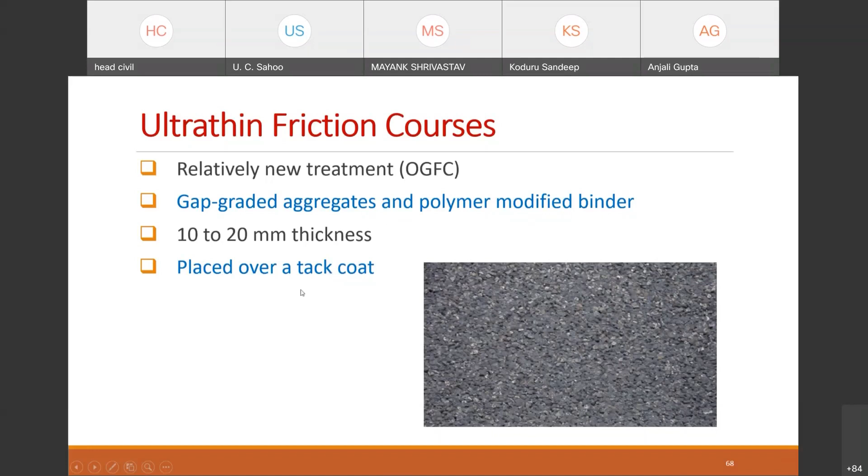So these are the different pavement maintenance techniques which we have already discussed and their applications.

So if you see, this chip seal can normally be applied for all conditions - for roughness, improvement in smoothness of the riding surface, friction, noise related issues, pavement life, or moisture things. So you can see the chip seal or surface dressing is effective in all aspects. That's why chip seal is one of the popularly applied preventive maintenance measures in most of the countries.

Similarly, microsurfacing is also like that.

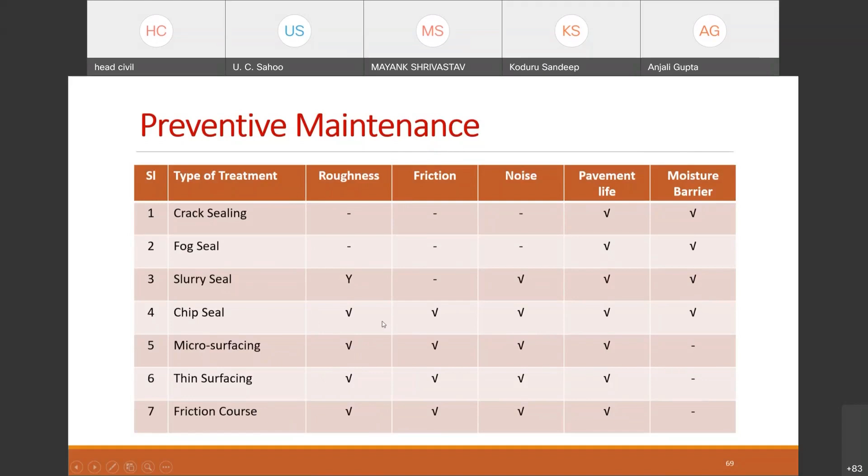So next is pavement recycling, and this is a relatively new method being applied to pavement rehabilitation very recently. Here, as you know, we need to conserve natural resources and compensate for the increased cost of asphalt binders. Day by day, we have seen in the first slide how much length of road we have been constructing. So that needs a lot of aggregates, a lot of binder, and we have also seen that the cost of bituminous products has increased during the last decade.

And that also has increased the cost of bitumen. So if some way we can reuse the materials in a more potential way through this recycling process, then you can save a lot of materials as well as a lot of money for the country.

So that's also another problem - geometrics. Like many times in city roads or urban areas, if you go on overlaying every 5 years or 10 years, you will see that the pavement level is getting higher than the adjacent shoulders and other geometric features. So that will cause rising of all these adjacent structures also.

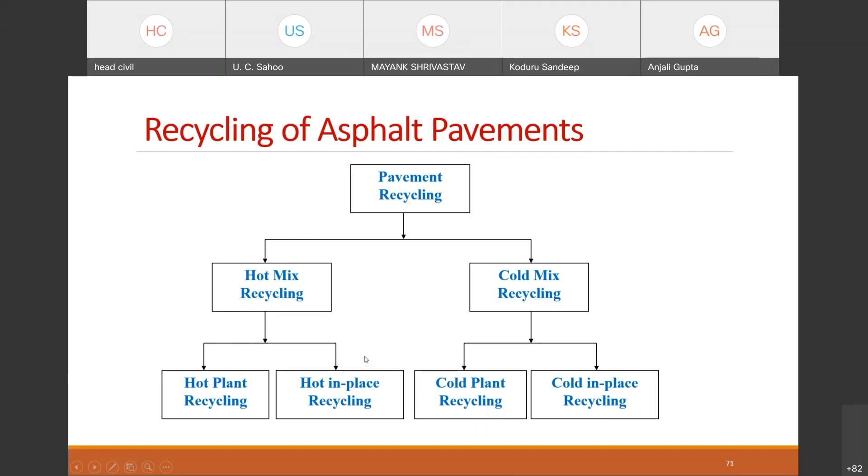Recycling of asphalt pavements has advantages: less user delay, conservation of energy, preservation of the environment. Conservation of energy, because if you go for cold recycling, that will save a lot of energy, and sometimes even with hot recycling there is a term called embedded energy. Embedded energy means the energy which had already been spent in production of the aggregates or binder. So when you reuse these materials, you also conserve a lot of energy.

Preservation of the environment because of the recycling process, reduced cost of construction because of reuse of materials, conservation of aggregates and binder, and preservation of existing pavement geometrics, etc.

One of the popular methods is mill and fill. What do we do in mill and fill? If you see this, let's say due to cracking and other things, these two bituminous layers, BC and DBM - bituminous concrete and dense bituminous macadam - have severely cracked.

Now the conventional way is that over that we put a thick overlay, or sometimes we put a geogrid and over that we put a thick overlay. But again, that will increase the level of the road surface.

But in the recycling process, what we do is mill the distressed portion up to a certain depth, and then make a fresh mix with addition of some more fresh binder and fresh aggregates, prepare the mix, then lay and compact it.

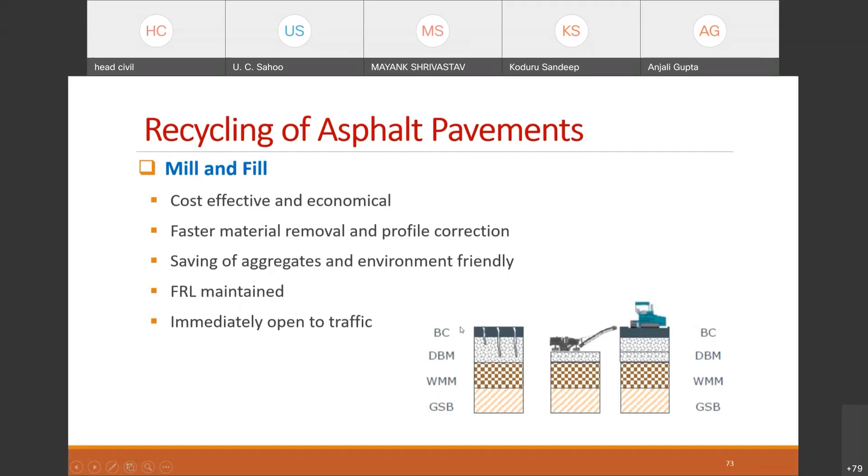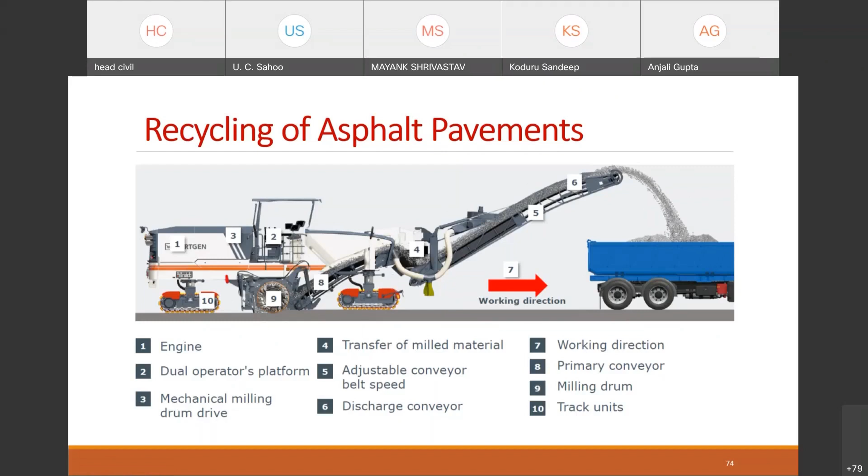You see it's milling in this working direction, and these are the aggregates - aggregate plus binder, which we call RAP. This RAP is taken to the batching plant and then the fresh mix is prepared, and then it can be relaid and compacted. But this can also be done in situ, as we'll see. This is how the milling is being done.

You can see this is a machine from Wirtgen, which is milling the road surface and then dumping into a truck or tipper.

This is how, after the mix is prepared, it is being relaid with a paver. This is the paving going on.

Now these are some in situ recycling processes. You see, in situ, after taking out the material, we mix it again with some emulsion - this is actually a chain of vehicles where we have emulsion and other things. This is a cold recycler.

All the recycling process - starting from milling, preparing the fresh mix, then laying and compacting - all is done by the recycler, and then it is compacted. This is done either by using bitumen emulsion or using foamed bitumen.

I hope all of you understand foamed bitumen. The foaming is also done in situ by adding hot bitumen and cold water, preparing the foam in situ, and then the foamed bitumen mix is laid and compacted. So cold recycling is done either using foamed bitumen mixes or using bitumen emulsion. These are the different chains of vehicles used in this process.

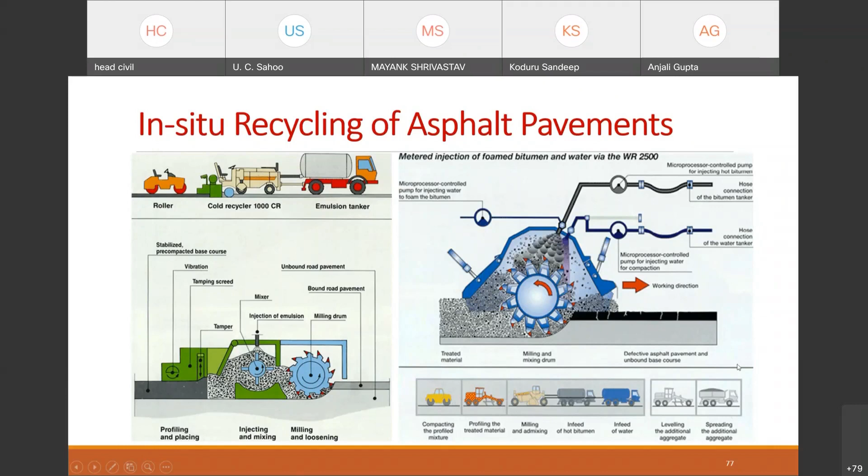Recycling is one of the important things in maintenance nowadays. We also need to understand the importance of drainage in maintenance. Most pavement failures are linked to the drainage system in a road. So if you ask who is the first enemy of the road, you will find it is the water. Second enemy is the water. Third enemy is the water. So drainage is one of the major causes of damage to roads.

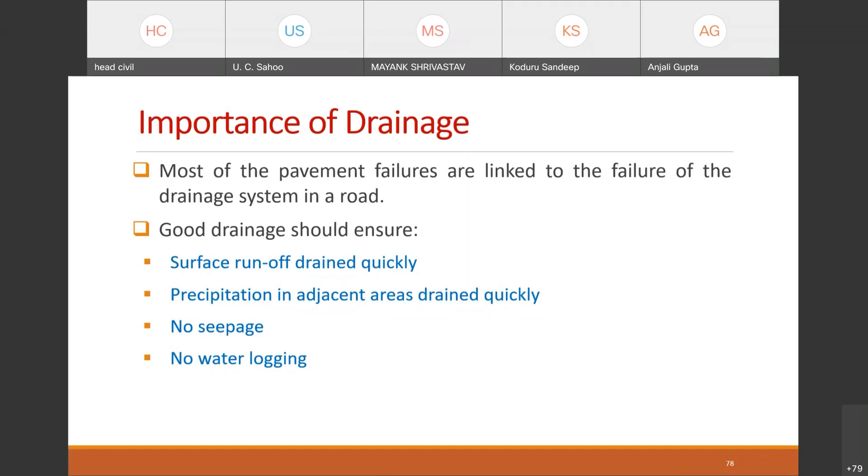That's why drainage should be addressed adequately to improve the structural as well as functional condition of the road surface. Good drainage should ensure good surface runoff. Precipitation in the adjacent area should be drained quickly, with no seepage and no waterlogging. To ensure this, you have to provide three types of drainage: surface drainage, subsurface drainage, and cross drainage measures.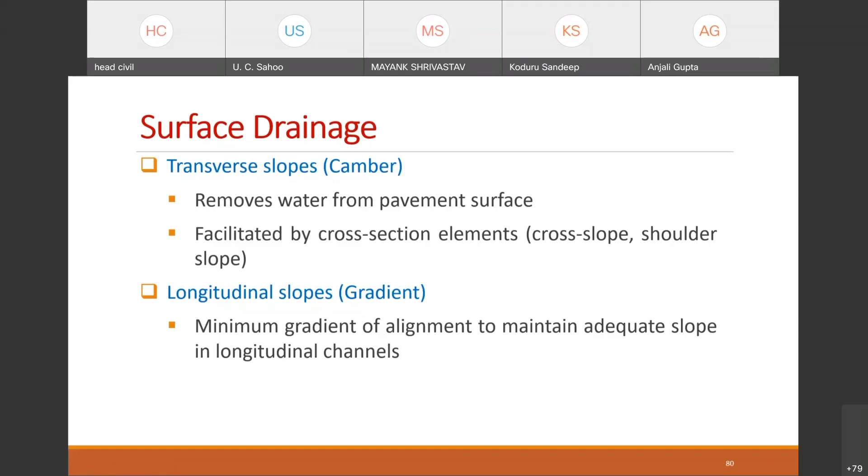Longitudinal slope is again required. Even if a gradient is not otherwise required, we provide a minimum gradient so that we can provide a side drain for that water with the same slope.

We also provide different types of other measures; in hilly areas we provide catch water drains, side drains, and other features. These side drains are linked or integrated with the cross drain, which is the cross drain or culvert. There should be a good system of drainage in the development of road infrastructure so that road deterioration can be minimized to a large extent.

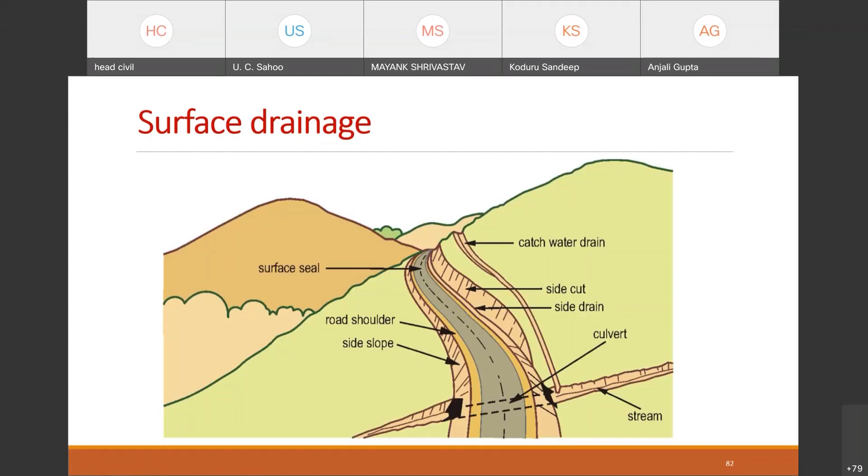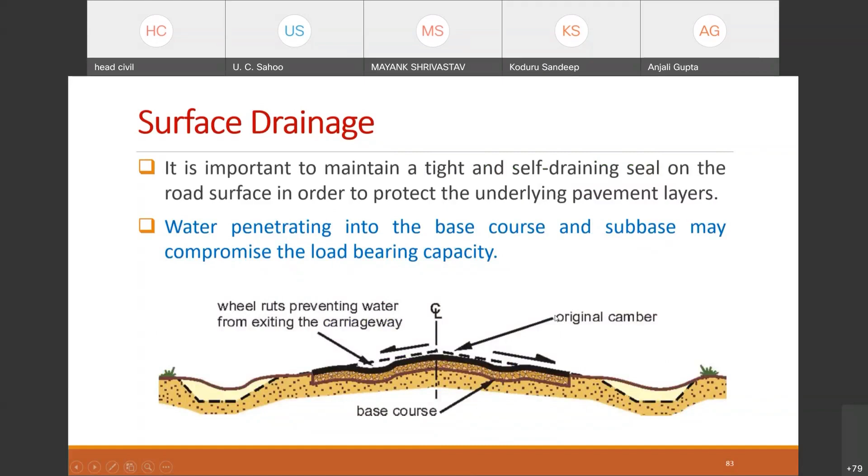For surface drainage, consider the importance of camber, and how rutting affects surface drainage. Water, if it gets stagnant, slowly starts penetrating and damages the surface layer as well as the base course layer, and subsequently the subgrade, by reducing the bearing capacity of the pavement. Surface drainage is also important in terms of shoulders.

If your shoulders are not maintained properly, the water will not find a way to drain off even if you have camber and other provisions. So the water will be stored on the pavement surface, and you can see the type of damage caused by improper maintenance of the shoulders.

Shoulder is an integral part of the pavement. You can see how shoulders need to be maintained, because instead of a falling gradient, if it is rising like this, the water will get stagnant and slowly start penetrating this way and that way, and the whole pavement will start getting damaged.

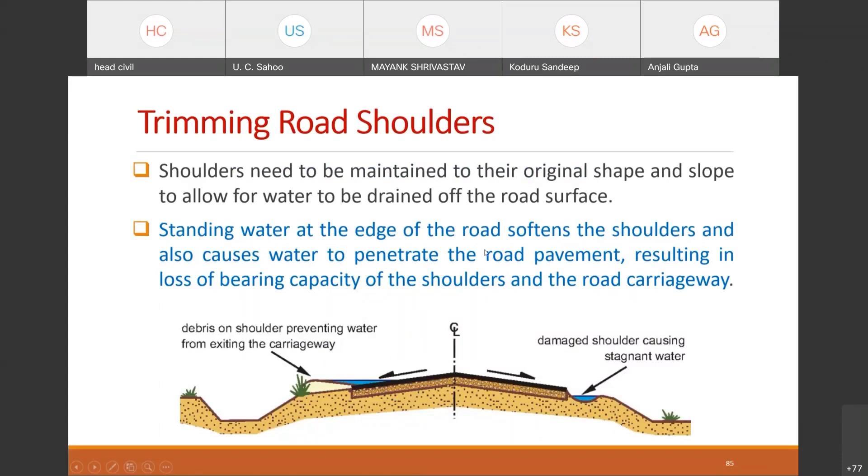Apart from surface drainage, subsurface drainage is also equally important. Moisture reaches the lower layers of the pavement either from the pavement surface through cracks, seepage from the shoulders, seepage from adjoining highlands, or capillary rise from moisture below. Water can penetrate through the cracks, come through the shoulders or joint interfaces, come from the highlands as seepage, or come from the bottom as capillary action.

All this water reaching the lower layers of the pavement requires a subsurface drainage system. This water is known as subsurface moisture, and the disposal of subsurface moisture away from the pavement is known as the subsurface drainage system. A lack of effective subsurface drainage results in premature failure of the pavement. These are the different sources, as discussed.

So what are the different subsurface drainage measures? We can provide drainage layers in the pavement so that any water coming from top or bottom can be drained off to the sides. You can also provide geotextile layers, like geocomposite layers, for draining any water coming into the different pavement layers to the lower layers, so it can be drained off.

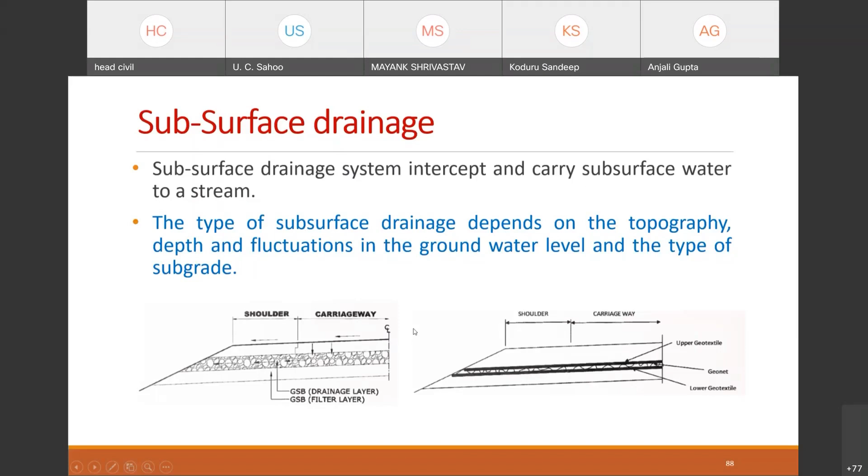This has to also be integrated with the side drains and all, so you need to understand that. This is the provision of drainage layers, and this is the filter layers.

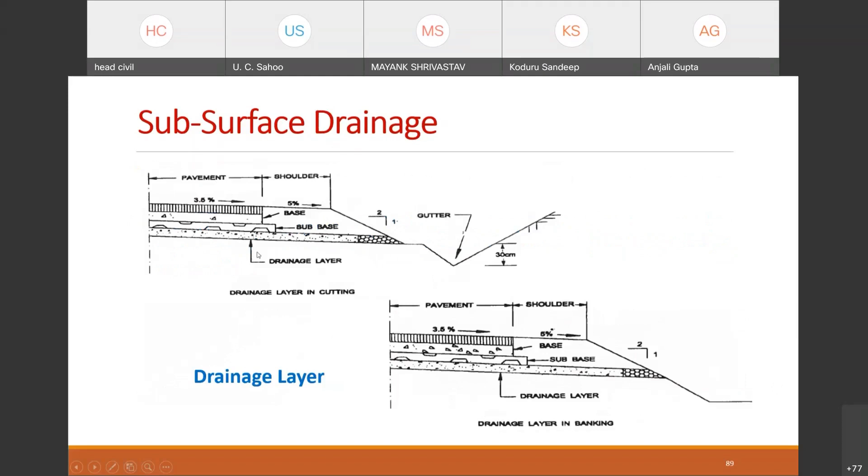If you have a highland on this side and there is a flow of water from this side, you have to collect this through side drains. Perforated pipes are normally provided, and these side drains, in closed side drains, are being provided with geosynthetics wrapped in them. This can also be provided. These are called intercept drains.

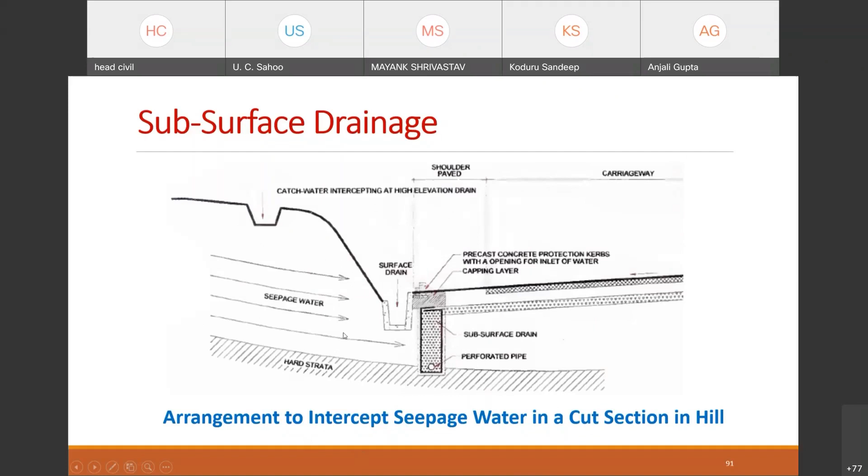Now let us understand how to plan the pavement maintenance. Based on the condition survey data, the causes for the development of various distresses and their effects should first be examined, as we have already seen. We need to understand the different reasons for the distresses. Then a decision shall be taken on whether to initiate or defer the maintenance activity, or to go for more detailed structural investigation to determine the rehabilitation need.

You have to take a decision on whether this particular type of distress is a functional distress or a structural distress. If it is a structural distress, you need to go for structural evaluation also, so that you can proceed with rehabilitation treatments.

Where severity of distress on the pavement influences the riding quality significantly, rectification measures should be taken straight away or immediately through appropriate maintenance treatments. Planning of various maintenance operations should be correlated and looked upon as a total system rather than each activity being considered in isolation.

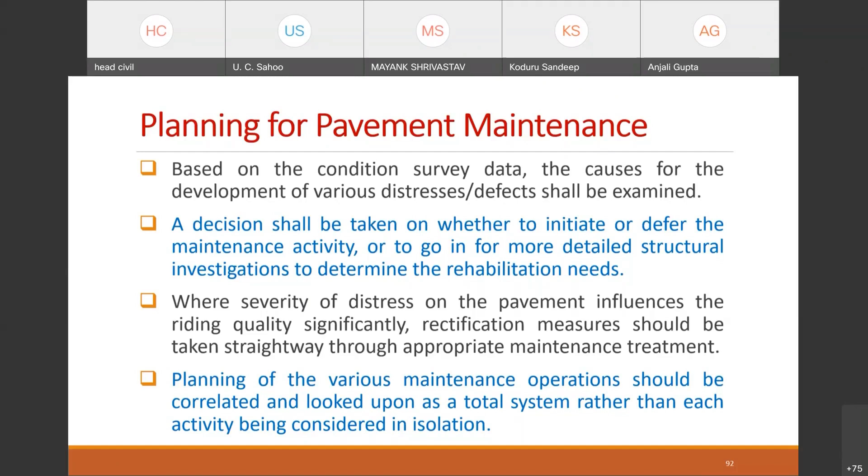So this is a system. Maintenance management is a system. You have to take a network of roads, and considering your budget and other factors, you have to decide which road to take up and what kind of maintenance should be done within the limited budget. That's why we need to plan for pavement maintenance.

A decision is normally taken on whether to go in for preventive maintenance measures like sealing, or application of periodic renewal or strengthening, based on the finances available. This is highly driven by the cost aspect, because failure to do routine maintenance requires premature periodic maintenance, which is 20 times costlier than routine maintenance. And failure to carry out periodic maintenance requires strengthening with overlay, which is 3 times costlier than periodic maintenance.

Similarly, failure to strengthen at the appropriate time requires rehabilitation or sometimes reconstruction, which may be 15 times costlier than periodic maintenance and 5 times costlier than normal strengthening.

So you have to have a pavement maintenance management system. There is a term called pavement management system, and another called pavement maintenance management system. There is a difference between the two. The PMS consists of a comprehensive, coordinated set of activities associated with the planning, design, construction, maintenance, evaluation, and research of the pavement. This is known as the pavement management system, managing the pavement starting from its planning up to its maintenance and evaluation.

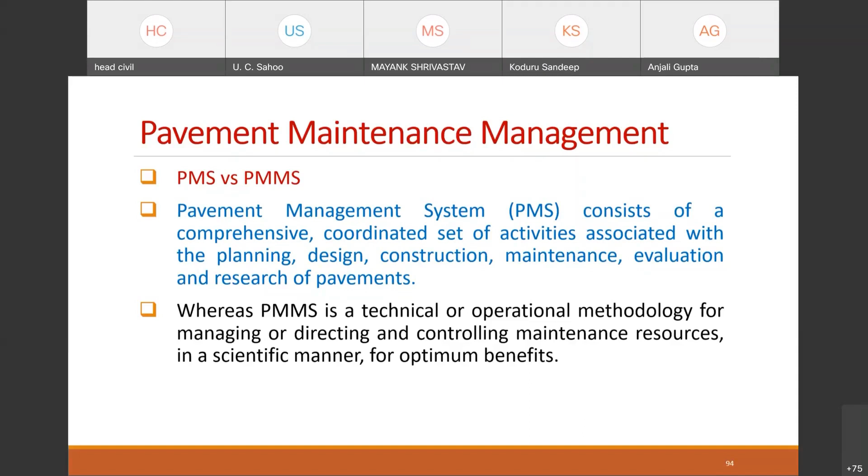So what is PMMS? Let us understand. PMMS basically performs the following functions: it is used to identify the projects in need of maintenance and repairs and to establish priorities, and to identify the type of maintenance and or rehabilitation required.

Third, requirement of type and timing of the future maintenance and repair works or rehabilitation works. Fourth, to minimize the life cycle costs or maximize the benefits. Last but not least, to predict the performance of the pavement in future. So these are basically the functions of the pavement maintenance management system.

So what does it include? A strategic goal—you will have a goal and a strategy for your pavement management system. For that, you first have to go for inventory, condition survey, and performance evaluation. After that, you have to measure the goals and expectations, and then use some prediction tools, pavement deterioration models, to predict performance. Then you have to go for some decision analysis tool, and then system integration.

Then you have to go for consideration of life cycle cost analysis in the decision process, because this affects the life cycle cost of the pavement.

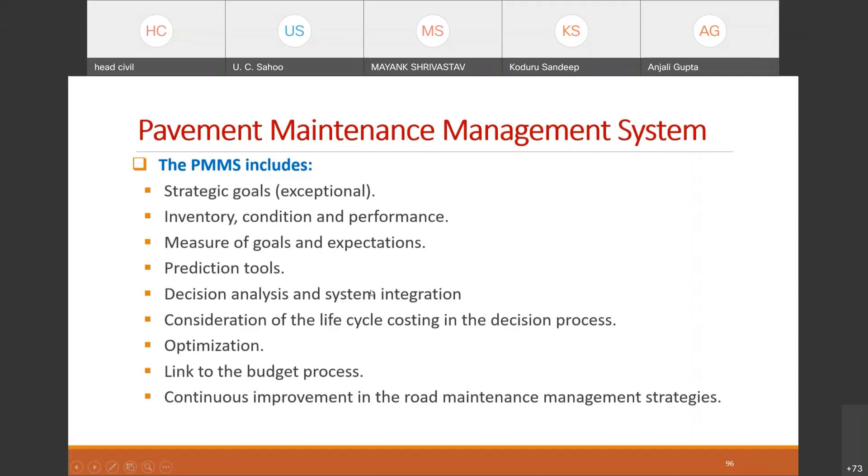So the key challenges in maintenance in India are basically about effective strategy. Whether we really have an effective strategy in India for taking up the different maintenance needs of our country, or carrying out the maintenance activities of the road network, the answer is no.

We do not have a clear-cut maintenance policy for our roads. That's why we do not have a policy framework as far as maintenance is concerned.

Maintenance funding is very inadequate and very low as far as maintenance is concerned. Integration of resources is also weak because we get maintenance funds from different resources, and that's why we do not have a proper way of integration.

Whenever funds come from this source or other source, we go for some activities, so we have to integrate them. Then there is effective management of available funds - whatever fund is available, it should be effectively managed.

For maintenance planning, you should have data collection and analysis. Periodically you have to collect the pavement performance data, so you need to understand the importance of pavement performance data collection and analysis.

Absence of rational planning - we do not have a rational planning process for what will be done and when. So if some state has good funds for maintenance, they will use it lavishly, whereas some states will not have maintenance funds and their roads will fail miserably. So it has to be judiciously used.

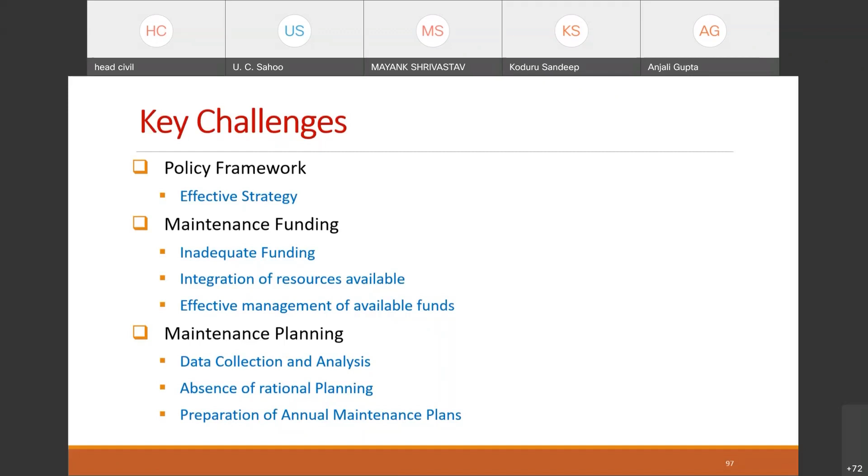Preparation of annual maintenance plans is also very much necessary. Then institutional and technical capacity - we are actually also lacking resources.

Regular pavement evaluation in terms of functional and structural aspects is very much necessary for planning the maintenance activities. There is inadequate technical capacity to investigate failures - if there is a particular failure, sometimes we do not have sufficient technical capacity.

We lack manpower in-house in most road departments, but we do not hire technical manpower from other agencies to investigate the failures. So without investigating, we go for certain maintenance measures which again fail within a short period of time.

We also have weak quality audit of maintenance work. We do not have a good quality audit mechanism for maintenance work. Normally for new construction we have a quality audit, but for maintenance works we do not have one.

Inadequate supervision - since maintenance work involves small amounts, supervision is also not involved in that. There are no incentives for sincere contractors. Those who are actually maintaining their roads properly should get good incentives, whether financial or non-financial.

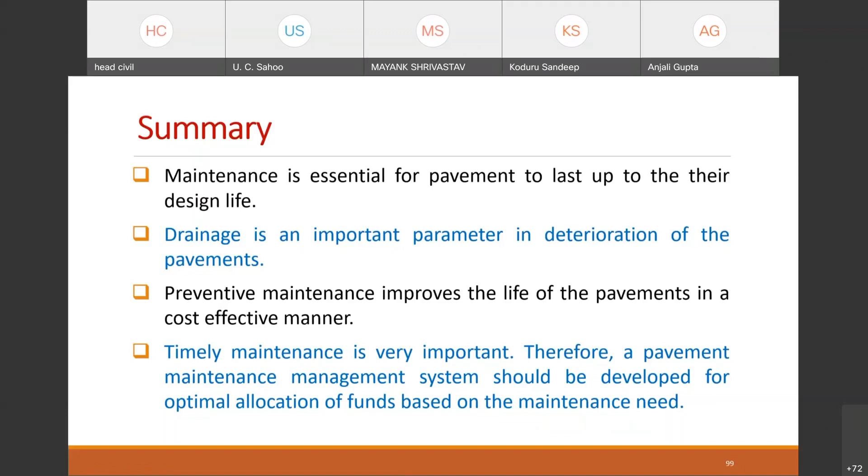I hope all of you have understood the concept of maintaining the roads and the need for regular maintenance of the road, the different factors which affect the deterioration of the pavement, the treatment methods we can take up, and the importance of timely maintenance of roads for longevity of the road pavement.